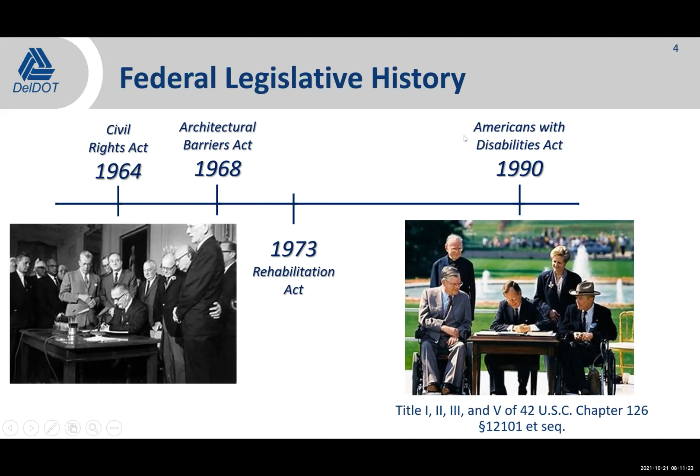So, the federal standards. We have our law, and the law required that the regulatory agencies adopt standards to enforce the law. So the 1990 Americans with Disabilities Act, out of that, the DOT and DOJ adopted standards, and the standard they adopted was the 1991 ADAAG, which stands for the ADA Accessibility Guidelines.

The original was created in 1991 and was superseded in 2004 by the 2004 ADAAG. The ADAAG was adopted in 2006 by the DOT and 2010 for the DOJ. In addition to the ADAAG, the DOJ adopted supplemental language in Title 28 of the Code of Federal Regulations, in particular 28 CFR 35.151. When these two are combined, it creates the 2010 ADA standards.

Additionally, the DOT adopted in the Code of Federal Regulations Parts 37 and 38. Something we're going to talk about quite a bit today is the PROWAG. PROWAG stands for the Proposed Guidelines for Pedestrian Facilities in Public Right-of-Way. This document is not a regulatory document. It's a guidelines document that's been created by the Access Board, but has not been adopted as a standard by the DOT or the DOJ.

Therefore, the ADAAG is the standard, and the PROWAG is a guidelines document. The FHWA has a statement to this effect in a memo they released in 2006, and that logic still stands today: until the proposed guidelines are adopted as standards, FHWA considers the proposed guidelines to represent best practices for accessibility issues in the public right-of-way not covered by DOJ's or DOT's currently adopted standards.

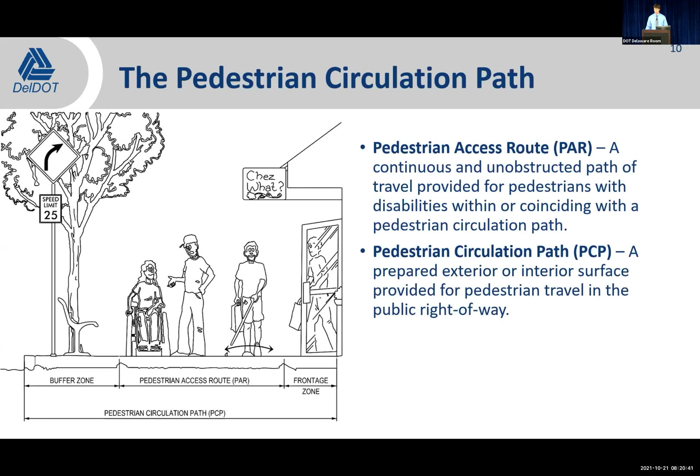2021 manual implementation: the department outlined the implementation in an October 14th memo. The memo broke down implementation into three categories: ADA inspection, request for practical exceptions, and design implementation.

ADA inspections occurring after November 1st are going to follow the requirements in the updated PASS manual. Requests for practical exceptions occurring after November 1st should also follow the 2021 manual.

The design implementation is a little bit more complicated subject, and the department has opted to use a phased implementation for this. We're going to talk about that a little more later, after we discuss why it needs to use a phased implementation.

Chapter 2 is entitled Project Type and Application of Standards. Again, a very important section. It summarizes the ADA obligations associated with the project.

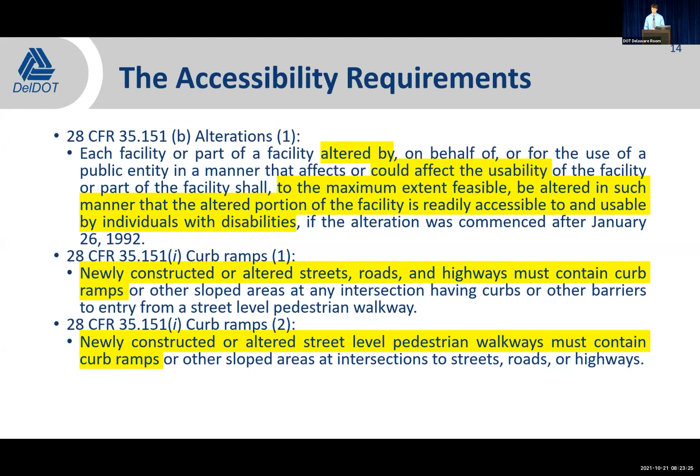So what does altered mean? Altered has been defined through the courts over the years, and the landmark case in this arena is Kinney versus Yerusalim. In this case, Kinney, the plaintiff, sued Howard Yerusalim, Secretary of PennDOT, and Alexander Hoskins, the Commissioner of the Streets Department of Philadelphia.

The suit says the city performed resurfacing but did not install curb ramps or other sloped areas on the street corners. The court determined that usability should be applied broadly, quoting, 'The ADA is a remedial statute designed to eliminate discrimination against the disabled in all facets of society. As a remedial statute, it must be broadly construed to effectuate its purposes.' Therefore, this court case ruled that resurfacing equals an alteration.

So now we've established that resurfacing is an alteration. However, there are a lot of different types of resurfacing. So questions were asked to the DOT and DOJ: what exactly is meant by a resurfacing? So much so that in July 2013, the DOT and DOJ created and released a joint technical statement establishing what is an alteration for resurfacing and what is considered a maintenance and preservation technique.

In December 2015, the DOT and DOJ also issued supplemental questions and answers, which is very informative - 15 questions and answers on the subject of maintenance versus alterations. When combined with the CFR language, you get three distinct levels of projects: new construction, alterations, and maintenance. It's important, coming from the road design background, to uncouple your preconceived notions of a 4R project or 3R project, and from an ADA perspective, just consider these three types.

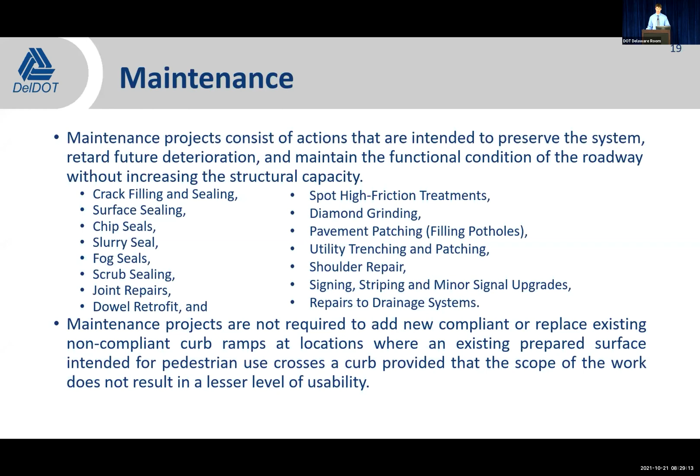One thing I want to highlight that's caused some consternation among our update team is the federal language stating that multiple maintenance activities may rise to be an alteration. That's the federal source language. When we discussed this, we decided to leave it as is - we didn't want to embellish on it, or make it too prescriptive or not prescriptive enough. The best thing to do in these instances is to contact the DelDOT Title II coordinator, and we'll talk through it. It's also important from a department standpoint to have some consistency across the state - we don't want items in the north treated completely differently than in the south.

So the last thing I want to touch on for project type and application of the standards is temporary conditions. So three documents on the federal level affect temporary conditions.

We have the MUTCD, the ADAG, and the ProWag. And of course, they all treat the issue a little bit differently.

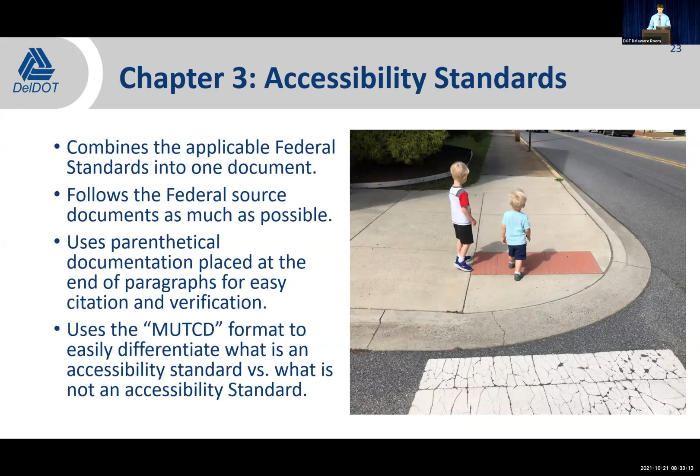So our first step as a team was to look at the difference between the two guideline documents, the ADAG and the ProWag. For example, for continuous width, the ADAG requires a 3-foot wide continuous width. The ProWag requires 4 feet. So we started with that baseline.

Here are the standards, here's the guideline, and what do we want to adopt as a department? From there, we said whether it should be a standard, what should be the standard, and additionally, if we should adopt some guidance with it. So that's the basis of the spreadsheet.

The spreadsheet was created, and then we circulated it out to the rest of the key stakeholders throughout the department to get their opinion, and had some discussions about what's in the best interest of the department.

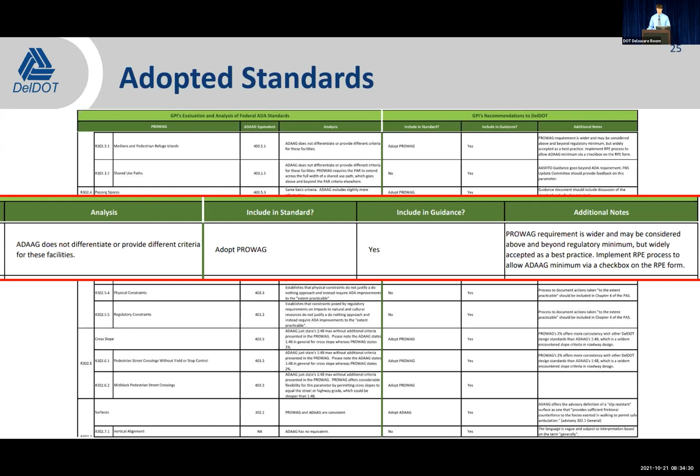Another programmatic change that we made is that we wanted to incorporate a design and layout standard versus an accessibility standard and acceptance standard. The idea behind this, what we're calling the accessibility buffer, is that if we're held to a 2% maximum from an ADA perspective, and that's the legal requirement, let's build to be below that.

So the really common example is the cross slope of the PAR. Cross slope of the PAR from an accessibility standpoint must be 2%. However, in that case, what we wanted to do was design at 1.5%, building in a buffer to account for potential irregularities or variances due to construction methods or materials.

Again, the hope is that over time this will lead to less rip-out work and just a better overall application, more user-friendly for the department.

So the standards format, mentioned before, we adopted the MUTCD format. Again, we took a couple options to the update committee, and this is what we thought would be the most clear.

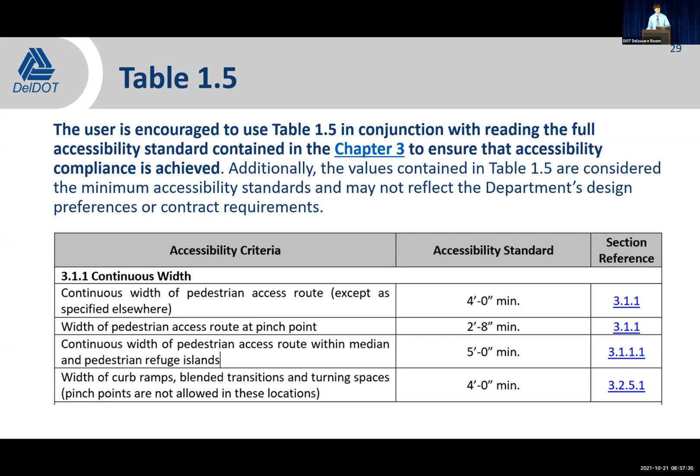One of the things we tried to do as well is add as much information from the standard as possible into that table. The standard is a standard, and if you remove or add words from that standard, you can change the meaning. So we tried to keep as much language there as possible to avoid misinterpreting what the standard is.

And again, one thing that we did was bring this up to the front of the manual. You can see it's table 1.5, so it's in the beginning of the manual, so it should be even easier to access for the user.

So chapter 4 is design considerations, and it's used to supplement chapter 3. The idea behind it is to take the legalese writing of the regulatory language and put it into layman's terms, and also apply a typical standard manual formatting to the language, put it into plain English.

It also provides guidance and best practices, which are not necessarily accessibility standards, but by putting it in the manual, our thought is that we remove some of the subjectivity behind these practices and put them in a location clearly marked as a design consideration.

Also a nice thing about chapter 4 is it divides the guidance that's in chapter 3 based on facility type. In chapter 3 we're kind of stuck in the formatting and outline structure of the federal documents, but in chapter 4 we base it on facility type. So for instance, all the information about pedestrian connections is in one place, all the information about sidewalks is in one place.

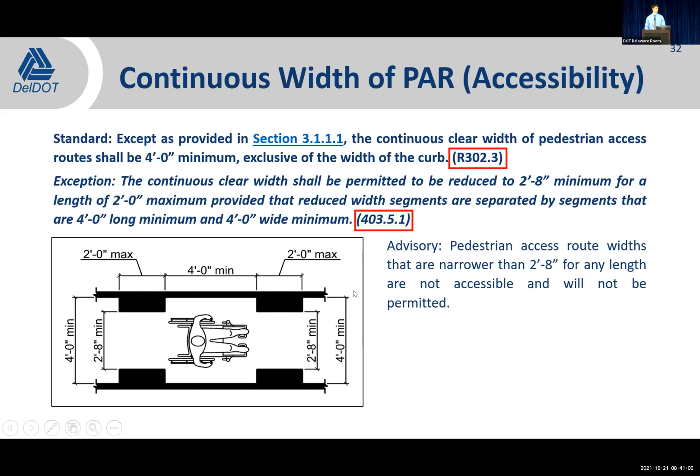And finally, we have an advisory on the slide as well. The advisory is department created. There's no parenthetical citation, and the advisory is intended to give the user additional information about the standard as well. In this case, access routes narrower than 2 foot 8 inches will not allow the mobility device user to pass, and therefore will not be allowed because it's not accessible.

A couple of examples real quick to work through how the standards are meant to be applied. First example: a sidewalk with a 3-foot continuous clear width, and a utility pole for a length along the path of 1 foot 6 inches. So it violates the standard, it's not 4 feet wide. However, it meets the requirements of the exception, which allows a minimum width of 2 foot 8 inches over a maximum distance of 2 feet. Therefore you met the exception, you did not violate the standard.

The next example is a 3-foot wide continuous clear width over a 5-foot length. In this situation we didn't meet the standard and we didn't meet the exception, therefore we violated the standard. However, the information in Chapter 4 provides information about the 2010 ADA standards, so even though we violated the department standard, we need to generate an RPE. We can justify that RPE with the federal accessibility standards because we've met the federal accessibility standards for a 3-foot wide continuous clear width.

Finally, example number 3: we have a 2-foot, 2 foot 6 inch wide access route, and that's not allowable. The mobility device user cannot pass through that distance, therefore it's not going to be allowed.

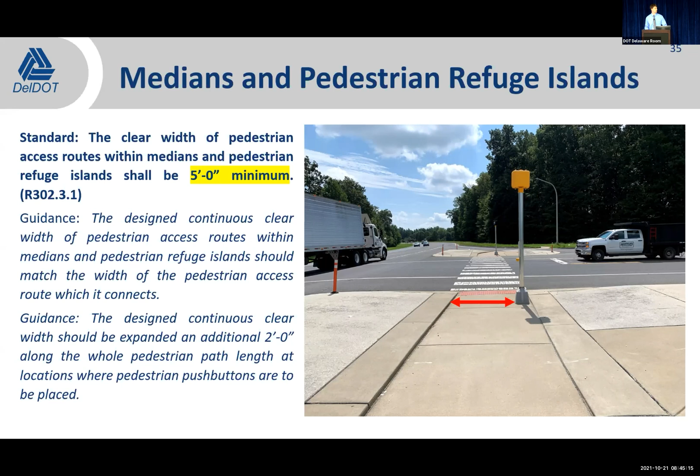Chapter 4 summarizes all this information as well. That 2 foot width, you can see the red arrow here on the slide, is the minimum width. So this is a 5-foot sidewalk, we'd add 2 feet onto that, and we'd get to our 7 foot through the median.

We accounted for this practice in our standard construction details as well. We put a note to that effect, so the standard construction details include the guidance. We want to try to meet that guidance where we can, so the standard construction details incorporate that guidance.

We mentioned we updated the width of sidewalks from 5 feet to 6 feet for some locations where there's not a buffer, and we accounted for that in the updated standard construction details. We added a note saying that if there's no buffer, please make it 6 feet wide. Again, our details are going to contain what we want to do.

Additionally, you can note that we incorporated that accessibility buffer into our details as well. We removed the 2% maximums and put in 1.5% design cross slopes and layout cross slopes, for example, to try to get what we want and give that accessibility buffer on the back end.

A couple other changes: that accessibility buffer has been distributed throughout the standard construction details. So wherever it said 2% max before, change that to 1.5%. Wherever the running grade, for example, was 5% max, we changed it to 4.5%. Again, try to create that buffer during the design phase.

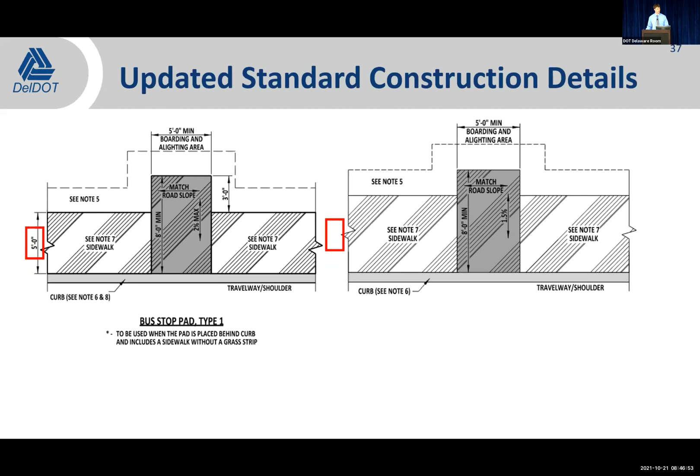Change the sidewalk width. So for example, in the bus pad details, sidewalk would defer to standard M3, which is for sidewalks, or to the plans. We removed that 5 foot dimension, so in the new details it just refers to M3. We also created that accessibility buffer by removing the 2% max, leaving it at 1.5%.

The other thing to note with the bus pad detail is that we removed the 3 foot dimension from the back of the sidewalk, and we left the 8 foot minimum dimension. The 8 foot minimum is an accessibility requirement, so we left that in there, and it also allows for variations in the sidewalk width.

A couple other standards we're going to go over: the grade of the PAR, the running slope. Departments are going to most typically perform work in the highway right-of-way, so the standard at the top is within street or highway right-of-way. That should be the department for the most part, and in those cases the running grade should meet the general grade of the adjacent highway.

Outside of the right-of-way, you're held to a 5% maximum. We also have a criteria for pedestrian street crossings: 5% maximum, and the department adopted a 4.5% design standard. So the road design folks out there are saying that my E-max the department allows is 6%, so that's a violation, we can't build up to that E-max.

So a couple of thoughts on this: one, the road design manual allows for 4% in an urban area, so the 4% would be below that 4.5%. And in addition, you shouldn't have those sharp E-max curves right at a sidewalk at an intersection usually.

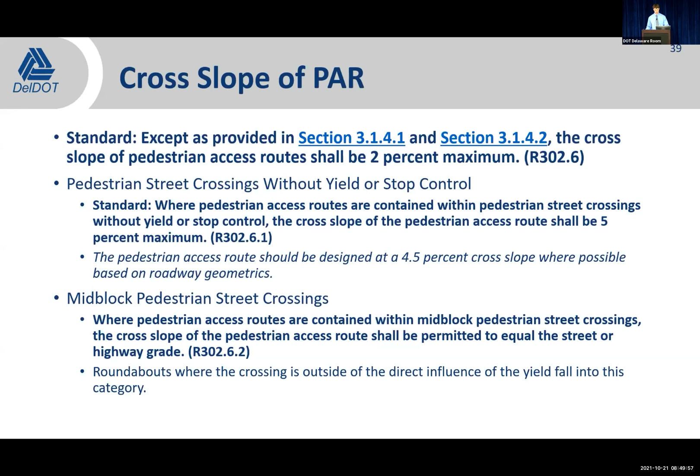One other thing to note: the cross slope requirements apply to just the PAR, not the entire pedestrian circulation path. An advisory from the ProWag states: where sidewalks are wider than 4 feet, only the portion of the sidewalk required to comply with R302.3 through R302.7 needs to meet that. So again, it's just the PAR.

You have an apron that's not depressed, it's flat instead. You have warping and a grade break inside of the path. When you go measure this, you're taking that 8-inch curb and transitioning that height difference over a 5-foot sidewalk, resulting in a slightly higher than 10% cross slope on that driveway entrance. That's not allowable under the ADA.

Our standard construction detail shows the proper treatment, and that is you have a ramp that flattens the whole sidewalk area inside of the driveway entrance.

Entrances are designed more like a pedestrian street crossing - everyone knows this location out here in Dover. This is a high volume entrance, designed with return curbs. This application should be treated more like a pedestrian street crossing. In that case, as long as there's no yield or stop control, you're allowed to have up to a 5% cross slope.

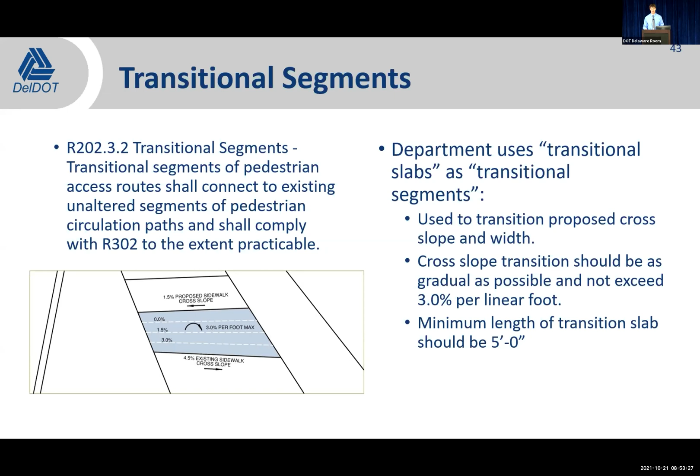This is a note we added to the standard construction details to state that practice - a 5-foot transition slab where we're meeting an existing sidewalk with our proposed sidewalk, stating we want not to exceed a 3% per linear foot transition rate.

Pedestrian street crossings: a pedestrian street crossing occurs anywhere the pedestrian leaves the approach sidewalk or shared use path and enters the street. They're typically called crosswalks, and they can be either marked or unmarked - it's not an ADA requirement whether they're marked or unmarked.

It's also important to note that R204.3 of the PROWAG specifies that a pedestrian street crossing is essentially required wherever there are departure and arrival pedestrian access routes. If there is no connection across the intersection, then you don't need to provide a compliant pedestrian street crossing because one isn't present. The crosswalks themselves create conflicting movements between pedestrians and vehicles.

So it's important that they be designed to be clear, predictable, and visible both to the driver as well as to the pedestrian.

PROWAG standards are also required, and we'll discuss that more later. Skewed crossings are included in Chapter 4 to give some guidance on preferential treatments, not an ADA standard. Skewed crossings create greater exposure time to pedestrians, reduce operational capacity, and create additional accessibility challenges. Therefore, we want to try to avoid skewed crossings where possible.

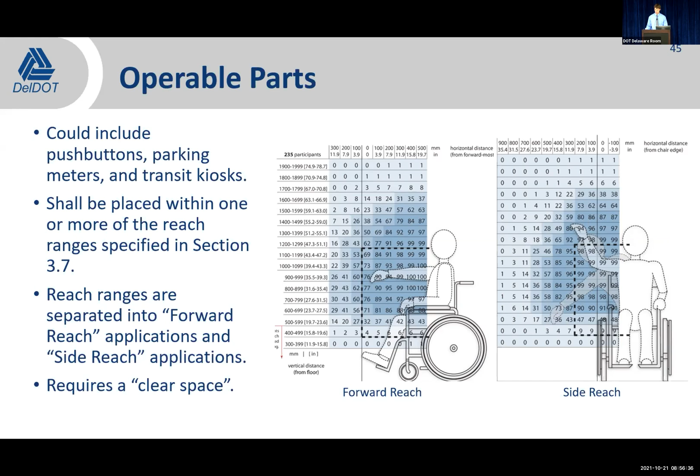Side reach unobstructed. The department's preference for all push buttons is for unobstructed side reach. Unobstructed side reach requires a maximum mounting height of 48 inches and a minimum mounting height of 15 inches. In addition, the other key requirement is the 10-inch horizontal distance between the clear space as well as the operable part.

The department's practice is that any surface that does not meet the surface requirements of section 3.1.5 - firm, stable, slip resistant - would be treated as an obstruction. In other words, between the sidewalk and the push button, you would have a 10-inch maximum for it to be considered unobstructed side reach.

In addition to unobstructed side reach, we have obstructed side reach. This should not ideally occur within the public right-of-way. However, it is an alternative and is considered accessible where it has to occur. There are two acceptable alternatives for obstructed side reach.

The one we'll use most often is alternative B in this figure. Essentially, in alternative B, the 10-inch horizontal distance gets extended to 2 feet from the clear space, provided that you meet the new height requirements of 3'10" max and 2'10" max. Again, this is not the department's preferred alternative.

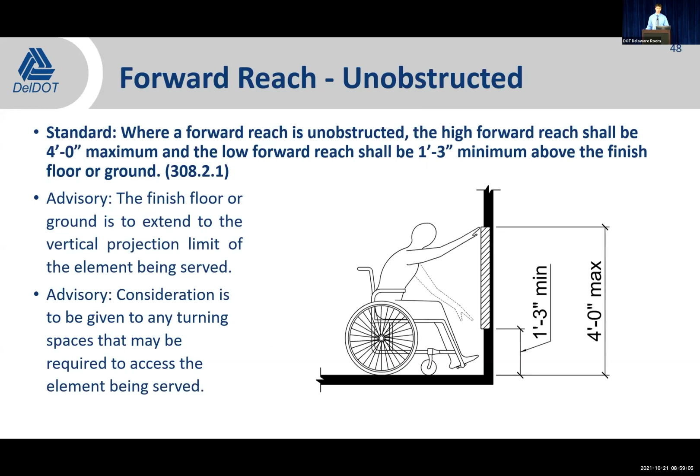The same advisories as the previous slide apply. You need to consider the vertical projection of the operable part extending all the way to the clear floor ground surface, and also consider any required turning spaces.

So, clear space. The definition of the clear space is a clear space. The Access Board does not give any more information on that. They give some technical requirements, which we'll go through right now.

The surfaces of the clear space shall comply with section 3.1.5, firm, stable, slip resistant. All surfaces of the pedestrian access route are required to comply with that section. It also requires a cross slope of 2%, which again applies to the rest of the pedestrian access route. So the takeaway is the clear space can occur anywhere on your pedestrian access route.

The size requirement is a 30-inch by 48-inch minimum. We talked about that before. The department also incorporated guidance here to try to provide accessibility for more users.

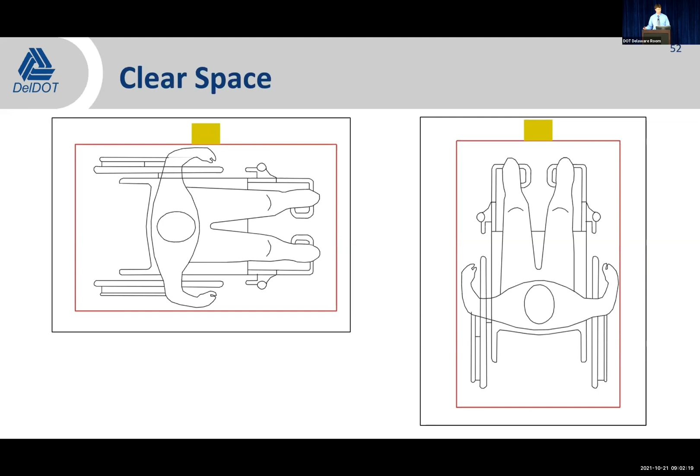What happens is that box turns into a 48 by 48 inch turning space. So again, a turning space is not required. However, you need to consider the pedestrian's movement at that operable part, because there may be a requirement to provide a turning space depending on how it's laid out.

As previously mentioned, we updated the DelDOT Standard Construction Detail T18 as part of this effort, to try to provide more flexibility to the department. Mounting heights changed—the new mounting height is now 38 inches to 46 inch max. The reason is that mounting height allows it to be considered either an unobstructed side reach or an obstructed side reach.

That said, we still want an unobstructed side reach for each pedestrian signal pole, and the details state this as well—we want this to be 10-inch maximum from the pedestrian access route. We also added a note that specifies that if it's only accessible from a forward approach, we need to extend the clear floor or ground surface all the way to the vertical projection limit of that operable part.

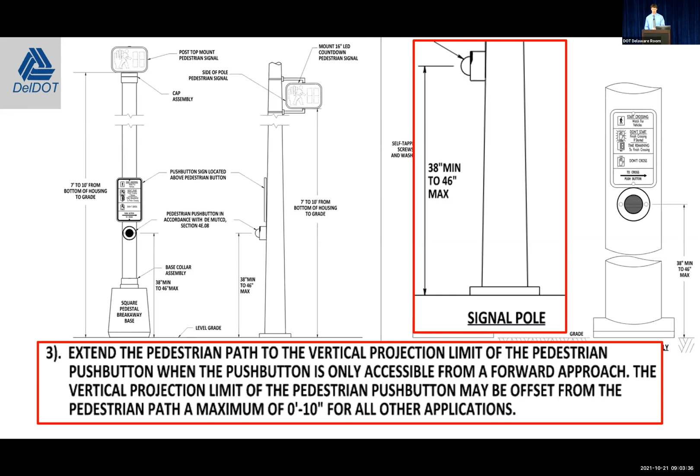So now we start to leave the accessibility standards—those are just for reach range and clear space. Now we're getting to the MUTCD. There is no mention of pedestrian signals or push buttons in the ADAAG. However, the PROWAG specifically says shall comply with MUTCD.

Once you get to the MUTCD, section 4E.08 Pedestrian Detectors has all the requirements for where the pedestrian signal should be placed, as a should condition—it's not a standard, it's a should condition. These are all the requirements on the screen, and it should meet all the following criteria, with the key word being should. Again, we've left the accessibility standards and moved into the MUTCD should conditions.

Figure 4E-3 summarizes the guidance from the previous slide and gives you recommended locations where that pedestrian signal can be placed. Again, you look at the hatching and it indicates recommended locations.

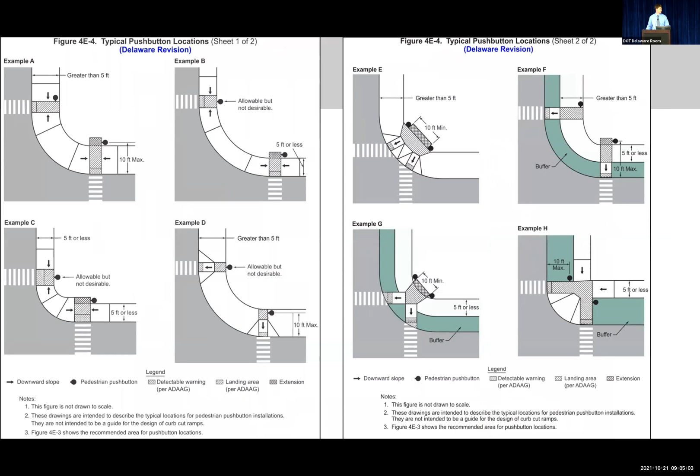Figure 4E4 of the Delaware MUTCD provides acceptable locations for mounting. Again, you need to consider how the user is going to reach for that pedestrian push button when they're approaching it, whether it's a forward reach or side reach, and how that clear space is coordinated.

The MUTCD doesn't require, but says the pedestrian push button should be placed parallel to the pedestrian street crossing. That's where we see the recommended versus not recommended arrows. The important thing is to consider how the pedestrian is reaching for that push button.

Accessible pedestrian signals are used to communicate information about the walk, don't walk signals at signalized intersections in non-visual formats. The ADAAG is silent on this practice, however the ProWAG has two sections on this, 209.1.1 and 209.2. That ProWAG guidance was not incorporated into the manual, because the department currently maintains interim guidelines for the installation of accessible pedestrian signals.

What was not incorporated was the statement that where pedestrian signals are provided at pedestrian street crossings, they shall include accessible pedestrian signals and pedestrian push buttons complying with the MUTCD. Additionally, for alterations, ProWAG stated that existing pedestrian signals shall comply with 209.1 when the signal controller and software are altered, which is different from the interim guidelines the department has. The manual essentially just kicks you over to the department's interim guidelines.

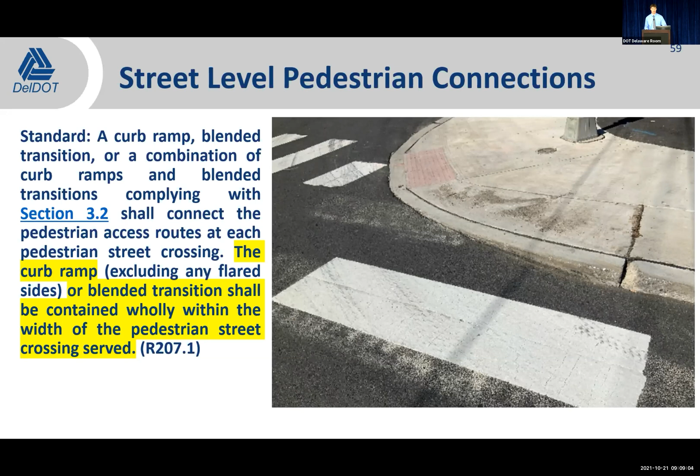Perpendicular type curb ramps. Curb ramps can be laid out in multiple orientations, which creates the name of the different types. So you have perpendicular, parallel, and diagonal.

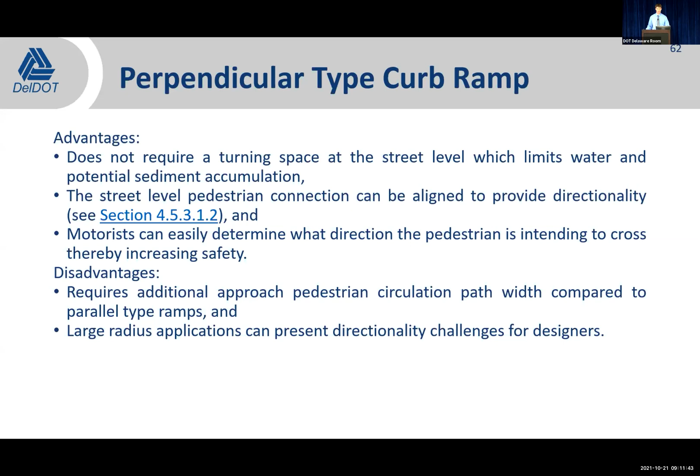Parallel type curb ramps are the next curb ramps we're going to talk about. Parallel type curb ramps have a slope segment that's in line with the pedestrian access route and brings the user down to a location where they need to turn in order to access the pedestrian street crossing.

Parallel curb ramps, again, will never have the flared side or the return curb as part of its assembly. The other key thing to think about is that the user is going to come down that ramp and then make a turn to enter the street.

Advantages of parallel type curb ramps: it requires minimum approach circulation path width, which is ideal for constrained locations. The ramps can be easily lengthened when required to chase grade. We'll talk about that a little bit more later today.

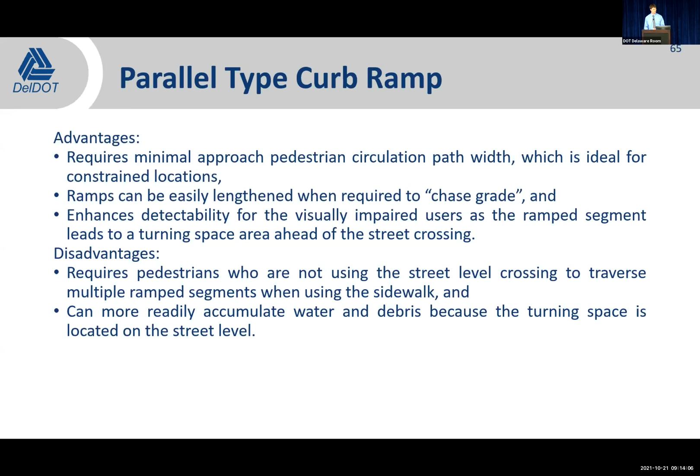Now we're going to start getting into some fun. Diagonal type curb ramps are laid out very similarly to that of a perpendicular type curb ramp. The key difference is that diagonal curb ramps serve two independent street crossings, while perpendicular curb ramps only serve one.

And why this is important is that the ADAAG, the 2010 ADA standards document, provides additional technical requirements for diagonal curb ramps. Therefore, it's important that the department creates a definition for diagonal curb ramps, so we make sure that if we install one, it meets the accessibility requirements.

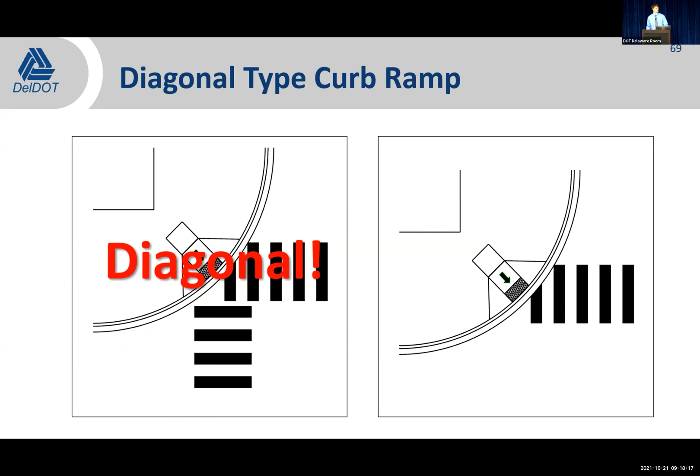And the one on the right is not preferable based on a directionality standpoint, but we'll talk about that more later today.

Last type of curb ramp, I mentioned this before, is that the three - perpendicular, parallel, and diagonal - can be combined, and the term for this is a combined curb ramp. Basically, a combined curb ramp has an inline ramp that takes the user down in elevation to a turning space, and the user can then turn in that turning space to access a perpendicular type curb ramp and go to the street level or to the street crossing.

So we've talked about the different curb ramp types. Now we're going to talk about the different blended transition types. Think about the definition I gave you before - the key criteria is that 5% slope, the running slope of the slope segment. So if you have a parallel type ramp that has a running slope of 4.5%, it's going to be considered a blended transition.

The other type of facilities you can have are depressed corners. They're self-explanatory - you depress the corner in order to have access to both pedestrian street crossings. Finally, we have a raised street crossing, which isn't very common in Delaware, but it's essentially a speed table or speed bump where the pedestrian access route is carried across the raised street crossing, acting as a traffic calming measure as well. Again, not very common in Delaware.

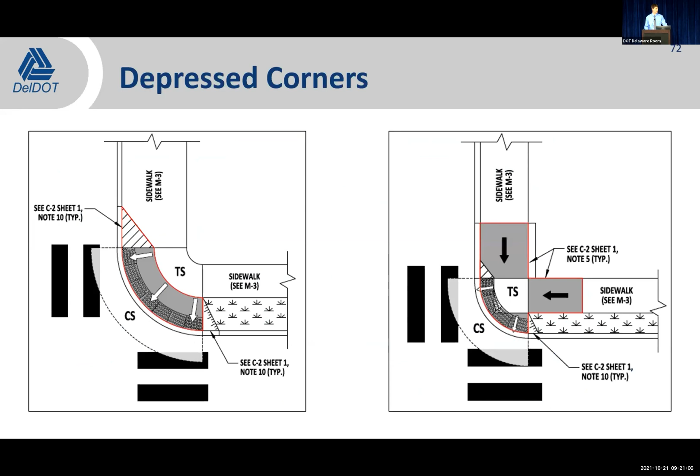Depressed corners are better than parallel curb ramps at alleviating drainage. You have a bit more flexibility on the slope - you're allowed a 5% slope where it intersects the street to try to prevent water from accumulating into the lower area. There's no turning space required, and no turning movement required.

They can be used at locations where there isn't enough space to provide separate street crossings for each curb ramp. The geometry and accessibility requirements make them ideal retrofits for diagonal curb ramps - we'll talk about that more a little later.

Disadvantages: poor directionality. There really isn't much in terms of detectable edges of the depressed corner to align the user. The boundary of the sidewalk and street is much more difficult for a person with disabilities to detect. They're also more difficult to drain than perpendicular curb ramps, which have a ramp segment that abuts the curb, making them more apt to prevent water accumulation.

Depressed corners can also encourage users to go over that corner return because they're depressed - if they want to go quickly, they can traverse that depressed corner area more easily than having a curb ramp with a curb keeping somebody out. Finally, it's difficult for motorists to determine which way the pedestrian intends to cross.

Raised street crossings - gave you the definition earlier. It's basically a speed table that's inside the pedestrian access route, allowing the pedestrian to cross the street on top of a speed bump or speed hump. There is an application in Delaware.

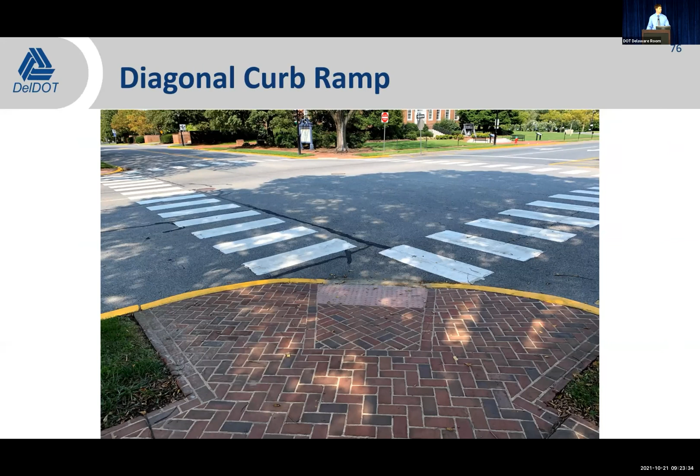You can see from this next slide why that'd be an ideal application to replace a diagonal curb ramp - basically it flattens out that whole area. Again, in this slide, two street crossings coming up to a single curb ramp - that's a diagonal curb ramp.

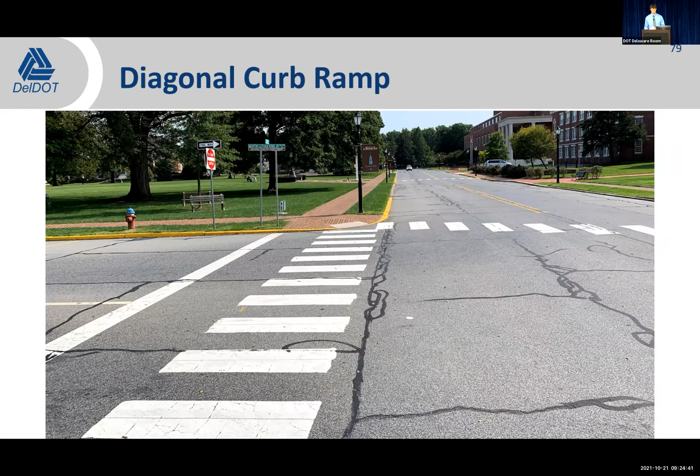So what we did as part of this update is research into what entities are calling parallel curb ramps and perpendicular curb ramps. We also reached out to the US Access Board, who wrote the standards, and got some guidance on this. The easiest thing I can summarize is: if it can have a flared side or a return curb, then it's going to be a perpendicular curb ramp. In this application, you could put a flared side on the curb ramp, or a return curb, and it would still be acceptable. With a parallel curb ramp, you could not. So for all intents and purposes, we're going to call this a perpendicular type curb ramp.

And we're also going to call this a perpendicular type curb ramp. You have another perpendicular type curb ramp here. Again, the key feature is whether you have a street crossing that's going horizontal to the screen. We definitely have one vertical, but since there's not a street crossing going across the main road here, it would be considered a perpendicular curb ramp with poor directionality.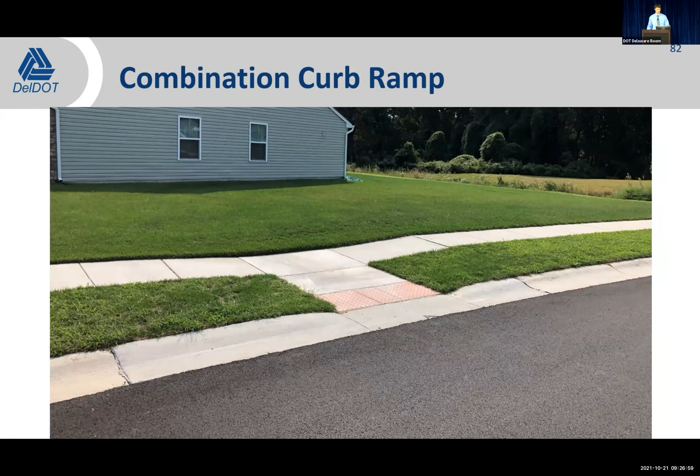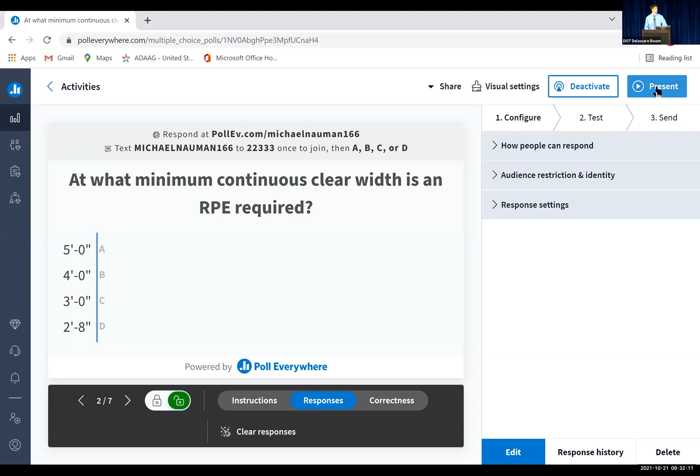So the first survey question is, at what minimum continuous clear width is an RPE required? You have the instructions at the top for how to go online and answer the question, or you can text it in.

Seeing the answers coming in, we got 2 foot 8 inches at 67%. No answers for 3 yet, that's good. 2 foot 8 inches is really starting to accumulate, awesome.

All right, so the answer to this one is kind of a twofold question. Let me wait for a second, see if responses are still coming in. Okay, I think we're starting to stabilize around the 80% mark.

So it's based on the standard as well as the exception. The department standard is the PROWAG standard, 4 foot. Then we have the exception of 2 foot 8 inches, so it depends on the maximum length of that obstruction. Going back to the examples we had before, that 1 foot 6 inch obstruction for a 2 foot 8 inch dimension is perfectly acceptable, you don't need an RPE. However, if that extends to 5 feet, like that 5-foot step, then you're going to need an RPE. Good answers, kind of a trick question off the bat.

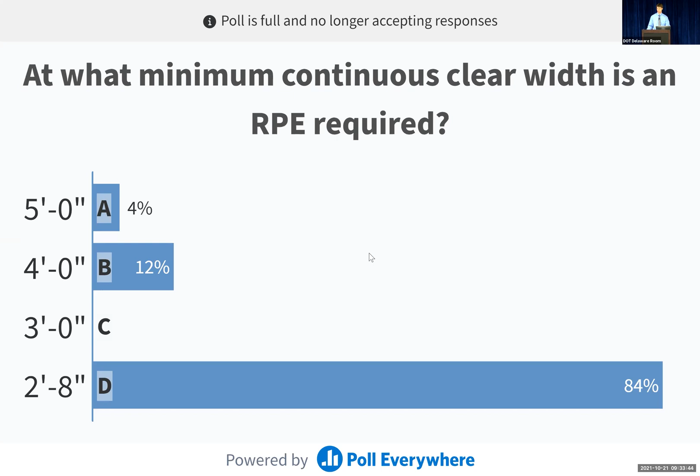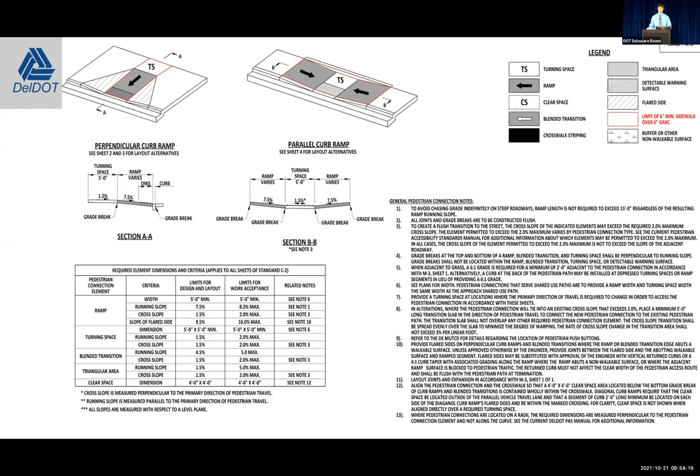So sheet 2 of the updated standard construction details - these are for type 1s, and the type 1 is defined as a perpendicular type curb ramp. We brought back the curb ramp terminology. For this application on sheet 2, it is dual approach perpendiculars - if you look at the top left, the user can access the perpendicular curb ramp from either the top of the screen or from the right. So dual approaches. The idea behind this is to give multiple layout alternatives for the designer to lay out in their plans, as well as for construction to say, this is how I need to lay out the components of the curb ramp in order to make a compliant feature.

Please note that we added a note to this detail to call out the diagonal curb ramp requirements. There are requirements specific to diagonals that aren't specific to the other types of curb ramps. The note says a single perpendicular curb ramp located on the apex of a curb return which serves two separate crosswalks is considered a diagonal curb ramp. Installation of a diagonal curb ramp requires the approval of the Department of Civil Rights Office. So again, we built the diagonal curb ramp idea into these details as well.

Sheet 3 shows more type 1s. Type 1s are all perpendicular type curb ramps, and we show how you can lay out a single approach perpendicular type curb ramp. Instead of being accessible from two directions as shown in the last sheet, these are only accessible from one direction, so a single approach perpendicular type curb ramp. We also included the note about a diagonal curb ramp - if one of these curb ramps serves two street crossings, it's considered a diagonal curb ramp and requires approval of the Office of Civil Rights.

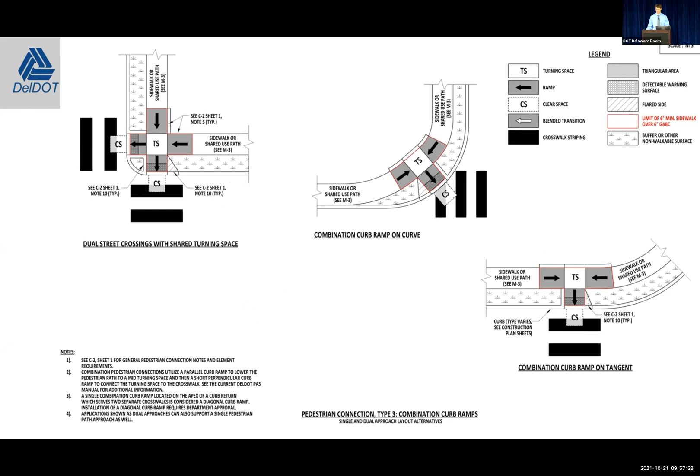Now that we've talked about the different types of pedestrian street level connections, we can start talking about the requirements. The easiest way to think about this is that the department adopted the PROWAG on these items because it offers additional flexibility not present in the ADAAG requirements. PROWAG breaks curb ramps into two sections and has an additional section for common requirements. There's also a section for blended transitions, also included by common requirements. Combining all those gives you the matrix on the slide, showing requirements for all the different types of pedestrian connections.

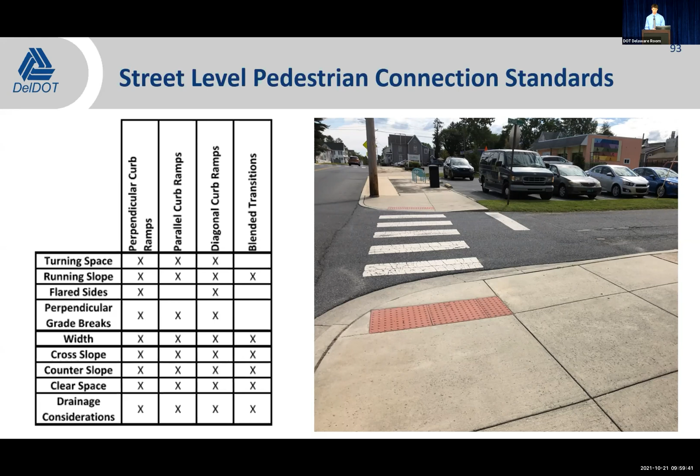First technical application we're going to talk about is turning spaces. A turning space is any location along a pedestrian access route which provides a location for a user to change their primary direction of travel. Kind of a vague definition, but that's the vagueness that's incorporated from the federal level.

They're typically located at the top of perpendicular type curb ramps. We talked about the layout of perpendicular type curb ramps before, and they're located at the bottom of the ramp for parallel type curb ramps.

The idea behind the turning space is it gives the user a location where they can orient themselves and change their direction to access either the pedestrian street crossing or to access the PAR. So because of that maneuvering that's going on there, we want to create a level area for them.

Level means a 2% running slope, 2% cross slope. We'll talk more about cross slope later, but that's generally the accessibility standard. And again, the department's adopted a 1.5% design cross slope and running slope for these applications.

Turning spaces themselves are required to be 4x4. There's additional requirements if you're in a constrained location, and typically the department's going to request that you design a turning space to be 5x5 minimum, and we have that back in our standard construction details as well.

A couple of slides to help you understand why turning space is required. Here we have red lines showing how the user can maneuver on the pedestrian access route. For instance, they can come up on one of the pedestrian street crossings, turn and go up the road or continue along the road. The user is going to need to make a turning movement at that location, depending on which direction they want to go. So perpendicular type curb ramp, turning space at the top of the curb ramp.

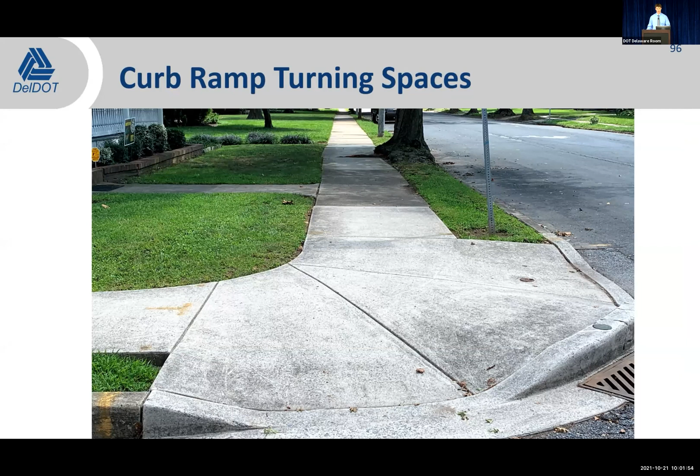The issue with this application is perpendicular curb ramps. User comes up and there's no level area or turning space at the top of the curb ramps to continue along the pedestrian access route. So that would be something that would be considered an accessibility challenge for the user, as they wouldn't have that level area to be able to turn and orient themselves on the pedestrian access route.

Parallel curb ramps. Again, same philosophy. Put down the red lines to show how the user can maneuver along that path. The red circles show you the user being able to turn to access the street or being able to turn and go up the pedestrian access route, the sidewalk. So that's why we need the level area at the bottom of the inline parallel curb ramp.

This application here, I believe it was referred to as a hot mess the other day. And the reason why is that there's no turning space at the bottom. So the user is on a curb ramp grade at 8.3%, and they're trying to maneuver themselves to get into that crossing. Very difficult maneuver for a mobility device user.

Now we come to combination type curb ramps. Again, see that middle turning space that's located between the inline parallel type curb ramp and the perpendicular type curb ramp that takes you out to the pedestrian street crossing, sorry.

So a question that I will ask you, and I want you to think about for a second, is a single approach perpendicular type curb ramp, where is the turning space? The answer is there is none. The user comes down and they access the curb ramp, they don't need to turn, and then they can access the pedestrian street crossing.

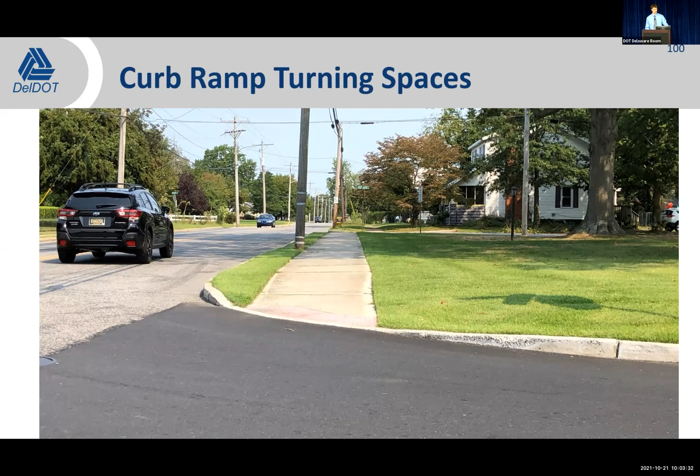The U.S. Access Board has guidance on this as well, and this is for the ADAG, but it also applies to the PROWAG as well. The image on this slide is from the Access Board, and their quote is, if the only connecting accessible route runs parallel to the ramp run, the top landing can be a slope of 1 to 20 max. That 1 to 20 max is 5%, which in the ADAG is the running grade that's allowable for a pedestrian access route. In our environment, from a public right-of-way standpoint, our running grade is permitted to be equal to that of the general grade of the roadway. So it can be 5% or it can exceed it if it's in line with the roadway.

So this is kind of the Access Board statement that we don't need a turning space where there's no turning maneuver. And the turning maneuver would be a change in the user's primary direction.

This practice is accounted for in the manual, especially in Chapter 4, and it's also accounted for in the details. The detail on the left covers perpendicular type curb ramps with dual approaches, where you'll have that turning maneuver at the top of the ramp. However, on the right side of the screen, we have a single approach perpendicular curb ramp with a see Note 5, which states you don't need a turning space since there's no turning movement required. This should only happen on single approach perpendicular type curb ramps.

Curb ramp turning spaces: we adopted the PROWAG for most of the pedestrian connection elements for our standard. The PROWAG requires a 4x4 foot area be provided for a turning space. However, the PROWAG also includes requirements that the turning space be elongated in the direction of the pedestrian street crossing in applications where the turning space is constrained. Constrained is not defined by the PROWAG in that application, so the department had to create their own definition of a constrained area.

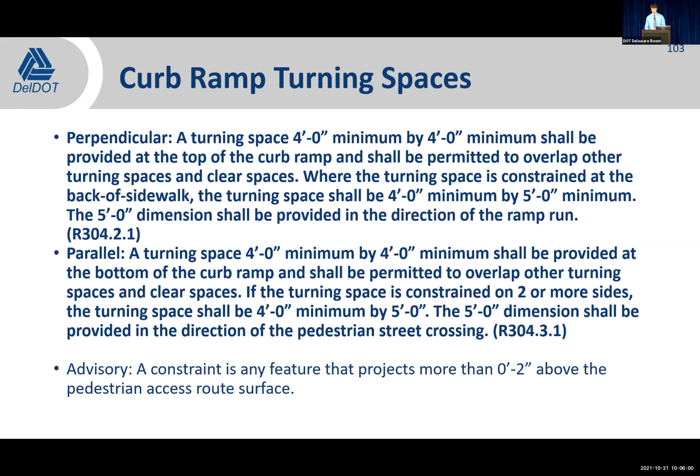Curb ramp running slope: a lot of us are familiar with the 7.5 or 8.3% running slope criteria for a curb ramp. However, there's a provision in the PROWAG, which we adopted and the department has used for some time, that the length of the curb ramp can be held to a 15-foot maximum, and the grade on that curb ramp can exceed 8.3% in grade chasing scenarios.

So our guidance is to lay them out at 7.5% up to 15 feet. If you need to exceed 15 feet to stay at 8.3%, just leave it at 15 feet and let the grade exceed that 8.3% maximum. We adopted a note for the details to this effect: to avoid chasing grade indefinitely on steep roadways, ramp length is not required to exceed 15 feet regardless of the resulting ramp running slope. This is why, in a grade chasing scenario, we don't want a perpendicular type curb ramp with a steep running slope throwing someone into traffic.

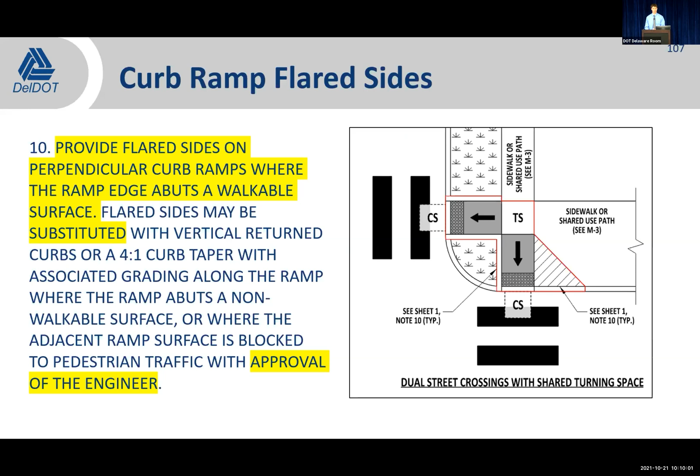Curb ramp grade breaks. A grade break is defined as where two locations that have separate slopes come together, i.e. a grade break. They need to be parallel or perpendicular to the path of travel on a ramp, because it makes for easier maneuverability onto and off of that ramp. If it's skewed, it can create some challenges for the mobility device user. So for ramps it's a requirement, and on blended transitions it's not required, but it's still a best practice to have the grade breaks be perpendicular.

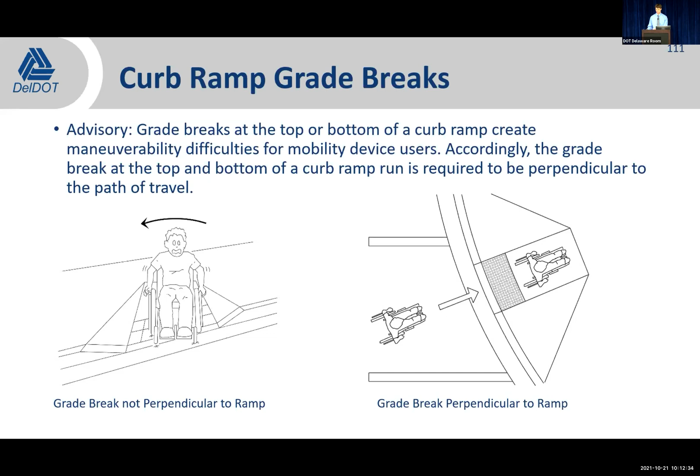So let's not do that. Again, here's an image that shows why this would be a challenge—the person would have to either swing wide to take that grade break perpendicular, or create some instability as they're trying to maneuver that.

Pedestrian connection width—this is another fun topic. For the ProWag, we adopted portions of it for this, specifically that all curb ramps, blended transitions, and turning spaces shall be 4 foot wide minimum. However, we also adopted a portion of the ProWag primarily related to shared use paths as guidance: that the turning space, blended transition, or curb ramp is to be the same width as the approach pedestrian access route.

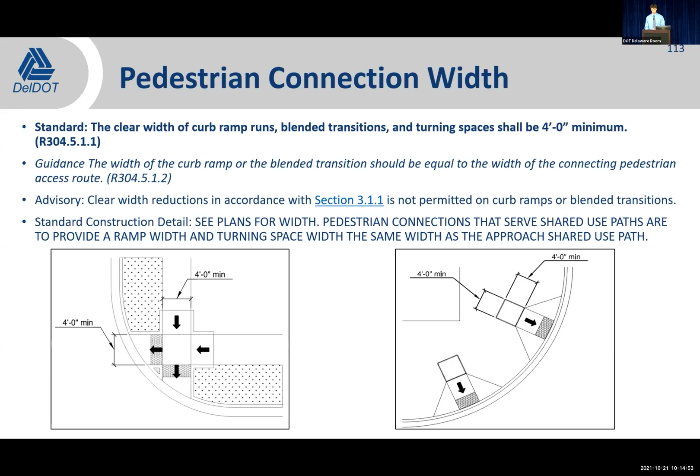The example I'm going to give here kind of shows why the department went the route it did: a 10-foot wide shared use path coming down to a pedestrian street crossing, with sidewalk on the far side and the near side as well. So the question is, is that curb ramp a violation of the ADA and the spirit of the ADA? Remember, the spirit of the ADA is to remove access barriers. If I ask the group right now whether there's an access barrier here, I'd probably get some mixed responses.

The current PROWAG would say this is an accessibility barrier, whereas the ADAG would say this is not an accessibility barrier. So to try to create some flexibility for the department and leave room for engineering judgment, we said at minimum we want a 4-foot wide curb ramp and a 4-foot wide turning space. However, please provide a path that's the same width as the approach shared use path - trying to get the best of both worlds here.

Pedestrian connection cross slope - this is going to be another fun topic. We talked before about section 3.1.4 of the cross slope requirements for the pedestrian street crossing, and the guidance here for curb ramps is very similar. Essentially we want a 2% max.

We want to lay it out to 1.5%. However, depending on the traffic control at the intersection, we're allowed to go up to 5% or to match that of the roadway. So if it's not stop controlled, without yield or stop control, we're allowed to go up from section 3.1.4 up to a 5% maximum. At a mid-block crossing, we're permitted to meet the general grade of the highway.

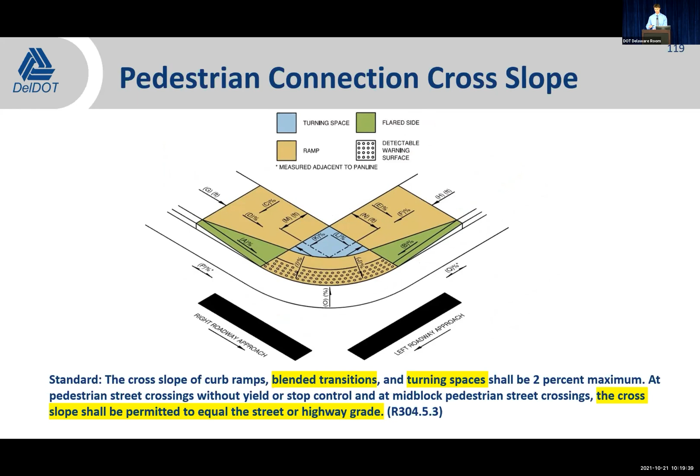I mentioned before that the parallel curb ramps are not going to have this issue of the transition because it's all contained to that turning space. However, perpendicular curb ramps, to meet the maximum extent feasible language of the CFR, are going to be required to provide a turning space or a connecting pedestrian access route that is compliant to the maximum extent feasible.

So what that means on this top image, if we have a paired perpendicular ramp, that turning space at the top of the ramp segment needs to be built to the ADA standard, which is 2% maximum cross slope, running slope 1.5% is what we want for design. So if the bottom of that ramp is held to the street crossing cross slope, that means that all the transition is going to need to occur inside of that ramp segment.

So the department adopted some guidance on this, and please note, this is not an ADA requirement. If you look through our standards, there's no requirement for how you transition that cross slope and the rate you transition that cross slope. However, we wanted to remove some subjectivity from this, and we wanted to give a criteria. So the criteria we adopted was a 3% cross slope transition rate over a per foot basis. So again, have a 5 foot ramp, multiply that by 3%, you get 15%, you can transition that cross slope.

Is that a best practice? No, we ideally want that to be flatter, but we really shouldn't have that occur very often in Delaware. And the 3% was a value that we evaluated from other states, what other DOTs are doing, and 3% is pretty common. Again, we don't want to hit that, but others are doing it, so that's what we kind of decided to follow. Try to remove some subjectivity from the practice.

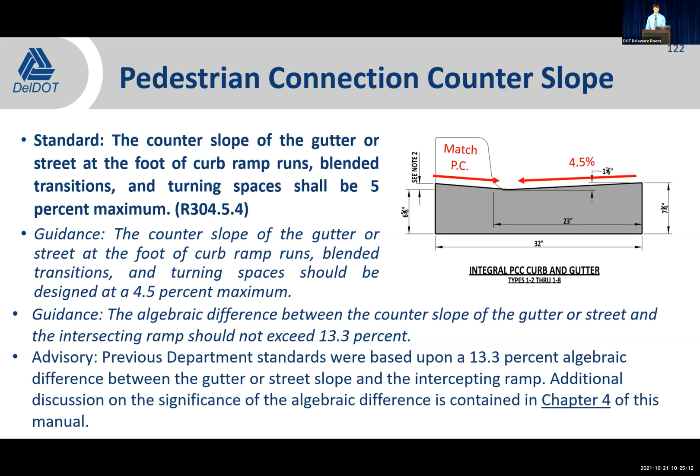One of the things the PROWAG also recommended was if you violate that counterslope criteria of what they suggested was 11%, was to add in a level strip, a 2-foot level strip between the two different slopes. So we have the slope of the ramp, and we have the roadway slope or the gutter pan slope, and they took a 2-foot area and put it between the two. The idea behind that is to not create that snagging point. In the top image, you see the wheelchair user coming down, footrest gets caught, and this becomes an accessibility challenge. Whereas in the bottom, you add that 2-foot level strip, and wheelchair users can more easily traverse that location. This is a mitigating technique that can be used where you're not able to meet that 5%, or you have other features there violating the actual accessibility principle behind the counterslope criteria of the maximum algebraic difference.

Now we get into pedestrian connection clear space. So clear space is in both the PROWAG and the ADAG, and it's kind of a difficult concept. So we're going to back all the way up to where the clear space originally came from.

Clear space originally comes from the ADAG, and for the ADAG, it came out of 406.6, which is just for diagonal curb ramps. The ADAG states that for diagonal curb ramps, the bottom of diagonal curb ramps shall have a clear space, 48 inches minimum, outside active traffic lanes for the roadway. All that's given from the standard standpoint is clear space. There's no technical requirements on the grade or the cross slope of that clear space. You can see on the image where that clear space aligns. You have that 4-foot area that needs to be outside the active travel lanes. Again, just a clear space, no technical requirements.

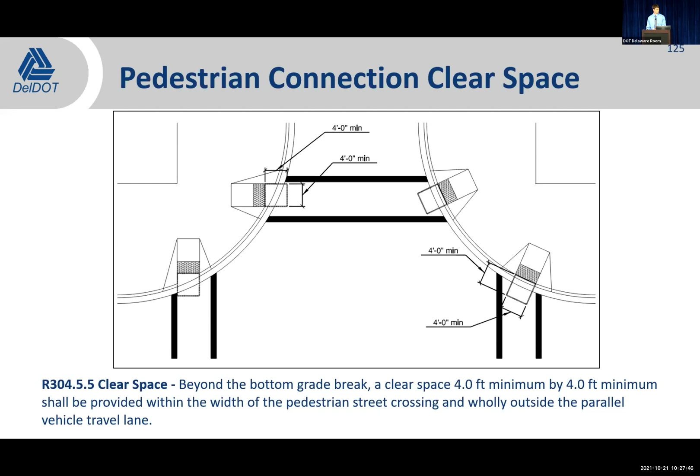So if you're like me and you hear parallel vehicle travel lane, you ask yourself, what does that mean? So we asked for clarification on what a parallel vehicle travel lane means. We got that clarification, and if the lane is marked, the travel lane would be measured from the outside of the striping. If the lane is not marked, it's to be measured from the tangent to the face of the curb prior to the radius. If there is a turn lane or auxiliary lane, it would be considered a travel lane.

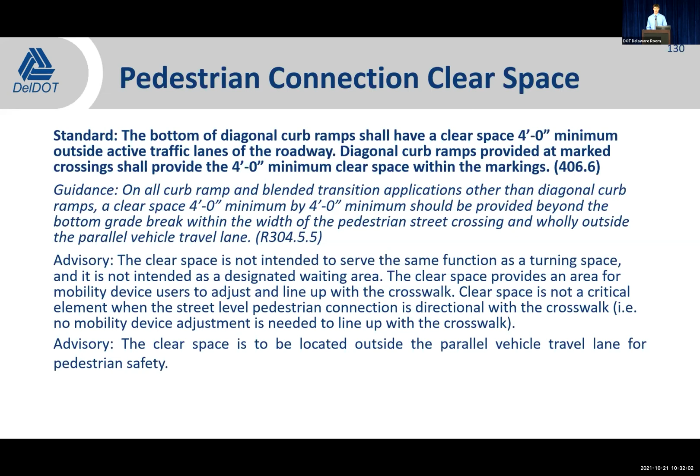Another topic we've talked about a lot as a department is our requirements for pedestrian connection drainage. The way pedestrian connections are laid out creates the potential for water accumulation—you're taking an elevated access route and lowering it to the street connection, while also channelizing water typically at the curb line. In addition, we're flattening the gutter pan slope based on our accessibility requirement for the counter slope. All those criteria create the potential to pond water right at the bottom of the ramp, and ponding water hinders operations both during and immediately after a storm event.

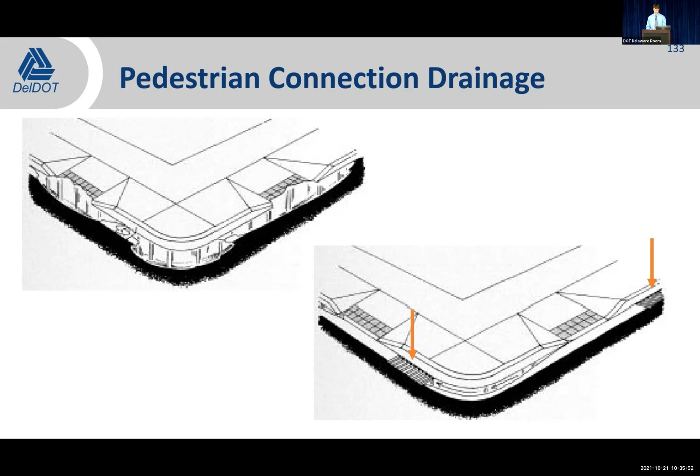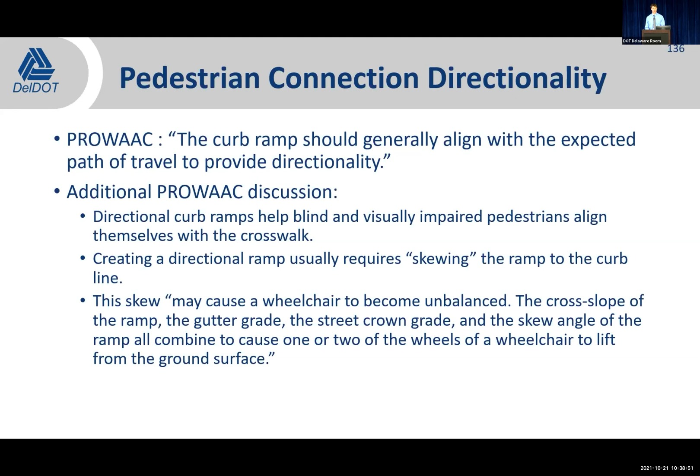They also recognize the challenges that creating this directional curb ramp can create. The PROWAAC contains the quote: 'The skew may cause a wheelchair to become unbalanced. The cross slope of the ramp, the gutter grade, the street crown grade, and the skew angle of the ramp all combine to cause one or two of the wheels of a wheelchair to lift from the ground surface.' So they're recognizing both the advantages and disadvantages. There's good and bad with this, and it's really related to the user.

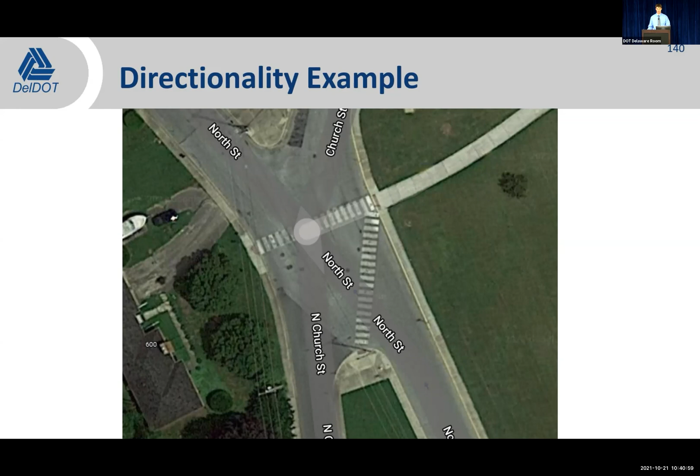Here's an example of two pedestrian connections and how they're coordinated with the marking. This is not good from a directionality standpoint, and it's also a violation of the ADA. The reason why is that the pedestrian connection is not wholly within the pedestrian street crossing.

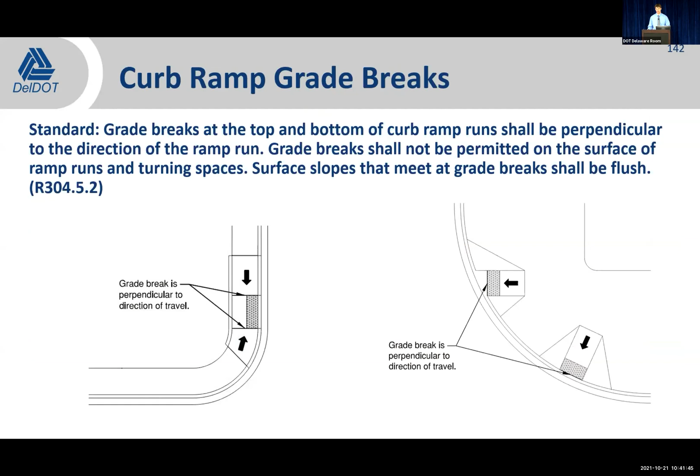The other thing to consider with this is the curb ramp grade breaks and how to consider that in connection with the directionality of the curb ramp. As we said before, on curb ramps where the ramp segment exists, we want the grade break to be perpendicular to the user's travel, and the reason why is to create stability for the user.

When you combine the principles of directionality with grade breaks, you arrive at two options. Option one is to place the grade break at the bottom of the curb ramp at a 90-degree angle to the curb. This is good from a drainage standpoint—you have the 8.3% sloped ramp segment at the bottom, which reduces the skew that can cause challenges for the mobility device user. But from an alignment standpoint, it's not in line with the pedestrian street crossing. Option number two is to create that funky triangle. The grade break is still kept perpendicular to the curb ramp, however you're creating that skew, which may cause issues for the mobility device user, and because you have that flat area at the bottom, you might have a location that can accumulate water.

If we do install that funky triangle, the accessibility standard for that is 5%. We would treat it as a blended transition, or we would treat it as part of the grade requirements for the pedestrian access route. But ideally we want to leave that at 2%.

So again, going back to what's in the manual about directionality: please note how the grade breaks are aligned with the pedestrian connection and the ramp, so that you create stability for the user and also create directional alignment. Again, this is contained in Chapter 4—these are design considerations we give you. It's not an accessibility requirement; it's for the engineer or the person laying it out to make these decisions on a case-by-case basis.

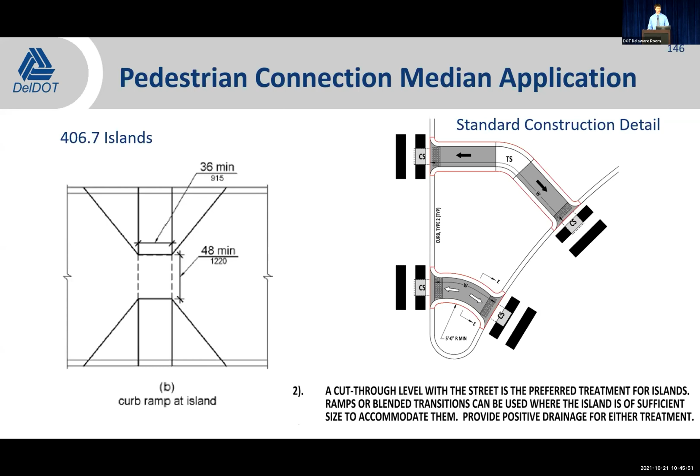This is the note we added to the standard construction details that makes the requirement clear: that 4-foot area at the top of ramped applications is required to have a turning space in those locations.

So, detectable warnings—truncated domes. It's important in this conversation that we focus specifically on truncated domes. There are other types of detectable warning surfaces out there, but this conversation is specifically about truncated domes, which have a specific meaning in the public right-of-way.

They're meant to indicate the boundary between pedestrian and vehicular routes where there's a flush connection rather than a curb. We all recognize that if there was a curb at the bottom of the pedestrian street crossing, a mobility device user couldn't go over it—so it's a barrier. However, that curb was a useful detectability cue for the visually impaired. So when we remove the curb, we have to put something back as a cue to alert the visually impaired to that street crossing. The truncated dome detectable warnings are kind of an accessibility compromise between those two user groups.

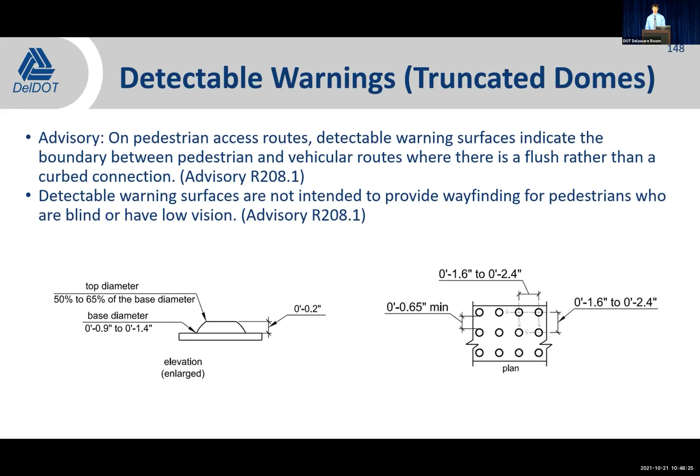So we adopted the ProWag language for locations to apply truncated domes. The nice thing about ProWag is that they included all the language about DWS requirements into one section, so it's very transparent and easy to find. The ADAAG essentially had the same requirements, but they're spread out in multiple locations, and they're essentially equivalent.

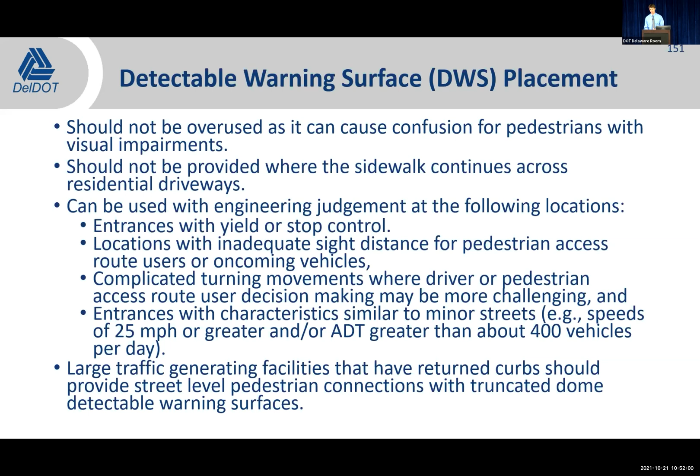One thing I hit on before for the treatment of pedestrian street crossings and cross slopes is large traffic generating facilities that are going to be designed as a pedestrian street crossing. So those areas, the large traffic generating areas that have return curbs, please add the detectable warning surfaces there, since that's going to act as a pedestrian street crossing.

So pedestrian connection DWS placement - the ProWag is very explicit in where they say to place DWS, and the reason they're explicit is those locations have been selected to present a clear message to the user.

For example, if we have a perpendicular street crossing and the DWS are placed too far off of that crossing, the user gets to that DWS, feels it, and doesn't feel any change in the surface after that, and it dilutes the message and confuses the user. Therefore, it's important to put the DWS in the location that makes sense for the user and gives them the most information they can.

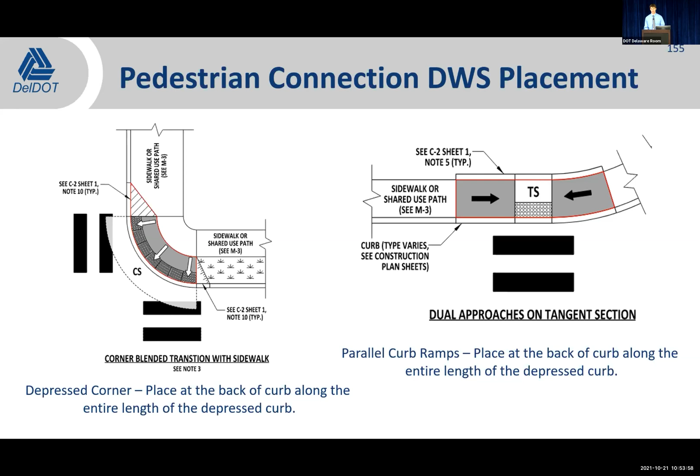And that's what's shown in this detail on the slide, and also shown on sheet 7 of the details as well. Parallel curb ramps, again, placed along the back of the curb along the entire depressed area. Pretty straightforward for both those applications.

Pedestrian refuge islands and median applications also require DWS. Again, the user is about to cross into the street, so we need to alert them to crossing into the street. The PROWAG contains language that if the pedestrian's travel path is 6 feet or less, or if the separation between the DWS is less than 2 feet, we shouldn't provide DWS at that location.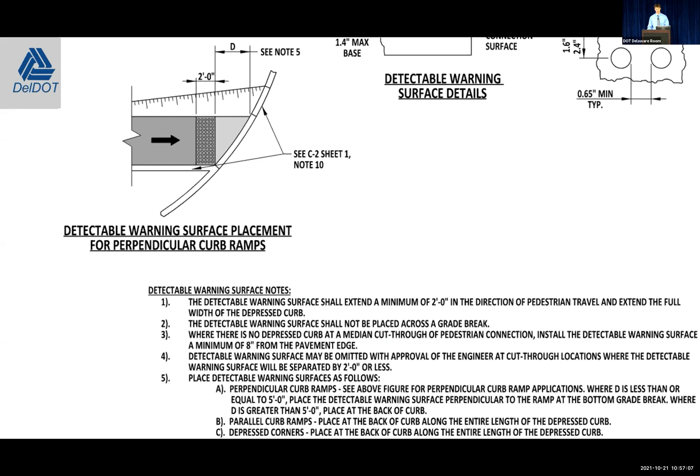We try to make the details as user-friendly as possible. We put all the information about DWS, truncated domes, in one location, on sheet 7. It essentially states everything I just talked about and where the DWS should be coordinated with the different pedestrian connection types. It should be very clear for the designer laying it out, as well as for the field staff constructing it, where the DWS should be placed.

One thing that's a little bit different, a change of practice for the department, is that DWS are permitted to be on the curb ramp run. Currently, we've kind of been avoiding putting them on the ramp run, but they are permitted to be on the ramp run.

So we're also going to talk about temporary access routes during the construction phase. Again, as mentioned before, these have the same requirements - there's a requirement under the ADA to provide access routes during construction as well. There are really 3 objectives during temporary conditions: you want to separate pedestrians from conflicts with worksite vehicles, equipment, and operations; separate pedestrians from conflicts with mainline traffic moving through or around the worksite; provide pedestrians with a safe, accessible, and convenient travel path; and duplicate the existing route as much as possible.

So here's an order of preference, from least intrusive to most intrusive. Our first priority should be to utilize existing facilities as much as possible - that's the easiest thing to do, and you can use pedestrian flaggers for this as well. The next priority should be to maintain a portion of the existing site on the same side of travel as the area being worked on, because you can provide same-side access to the land uses that people are trying to get to.

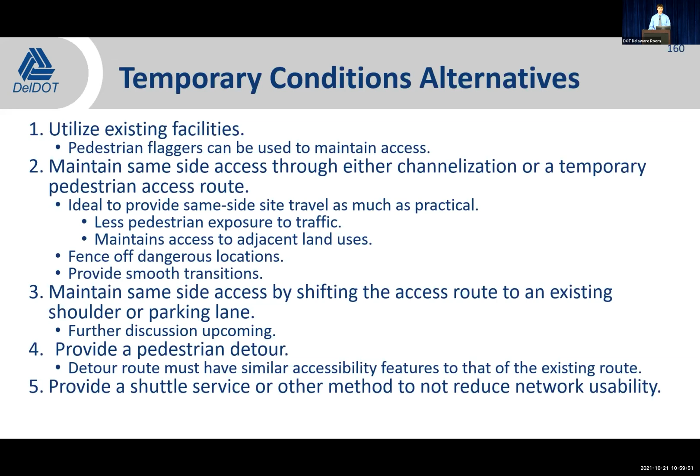If that's not available, what we can also do is provide a pedestrian detour. This is not as preferable as the other options. The pedestrian detour is going to require additional street crossings, which creates exposure for the pedestrian. And also, you might not be able to provide access to the same sites that you would if you maintained same side access. And finally, if none of those alternatives are available, you can provide a temporary shuttle service or other method to maintain usability.

This slide shows typical application 28 from the Delaware MUTCD. This is the alternative where you're taking, in this case, a parking lane and providing it for the pedestrian to access, provide same side access to the land uses. Again, can be considered on multi-lane streets as well, but you need to give consideration to the type of traffic that's there, as well as positive protection for the pedestrian.

Another alternative, this is TA29, provided pedestrian detour route, in the Delaware MUTCD. We provide a pedestrian detour route. It needs to be approved by traffic safety. In all cases, according to the MUTCD, the temporary route needs to provide similar accessibility and detectability features as that of the original route, and that's an MUTCD requirement. We want to adequately sign these locations so that the user is alerted to how to maneuver around these. We don't want them to go all the way to the work and then have to backtrack that same distance. So try to provide the signs in a logical manner, and again, use the MUTCD as a reference for this.

We want to create a compliant ADA work zone, and that sometimes just means thinking about some items during the design phase as well as the construction phase and how it affects the access route. In this case, we have a VMS board placed in the pedestrian access route, alerting the user to upcoming construction about 10 days out. The design group could have thought about where there's not going to be a building so they could place this VMS board and it'll still convey the message needed. And from a construction standpoint, they could have looked for another area, or rotated the trailer and sign so that it still provides the information needed, but is outside of the pedestrian access route.

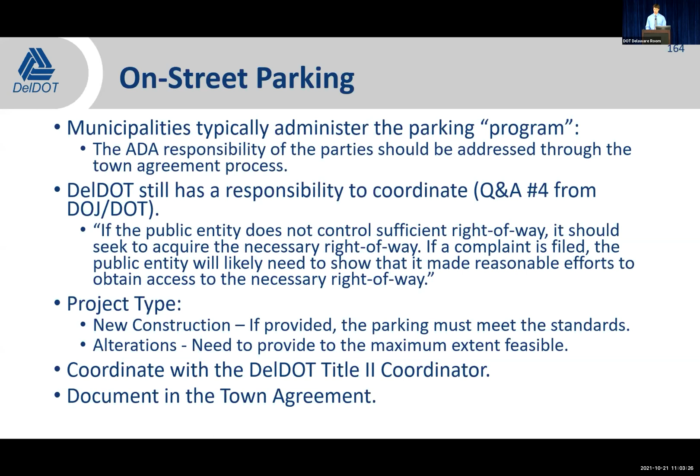The thing to consider with this too is it goes back to project scope. So new construction, you need to meet the requirements for on-street parking. Alterations, meet it to the maximum extent feasible. And maintenance, you don't need to consider the on-street parking requirements. Again, something to think about during the design phase early. Talk about it with the Title II coordinator, coordinate with them early, and try to get all of the information documented about obligations and agreements for the on-street parking into the town agreement. Again, the parking is the municipality's program, but we're affecting it, so it creates that multiple layers of authority and creates challenges for the department.

Moving out of the standards now. Real quick, I didn't think these items required too much discussion today, but I did want to alert everyone to some changes from the previous manual to the current one. Surface requirements, section 3.1.5 of the new manual—these are the firm, stable, slip resistance requirements that we're all familiar with. One thing we did in the updated manual is provide some additional clarification from the department standpoint on sedimentation and its requirements.

So we used the CFR language to provide a greater perspective of what sedimentation entails and requires. And we also added some more information for the user to consider.

The department had previously adopted the PROWAG language for vertical alignment, which was generally planar and generally smooth. That's now been adopted as guidance, since we thought it was really hard and subjective criteria to enforce. Instead we adopted something quantifiable, provided by the FHWA in their best practices manual from a long time ago: 11%. So if you have an algebraic difference in the pedestrian access route of 11%, please avoid that. Again, adopted as guidance, not a standard, but something we want to avoid. The good thing is it's quantifiable, so we can talk about numbers rather than generally planar and smooth.

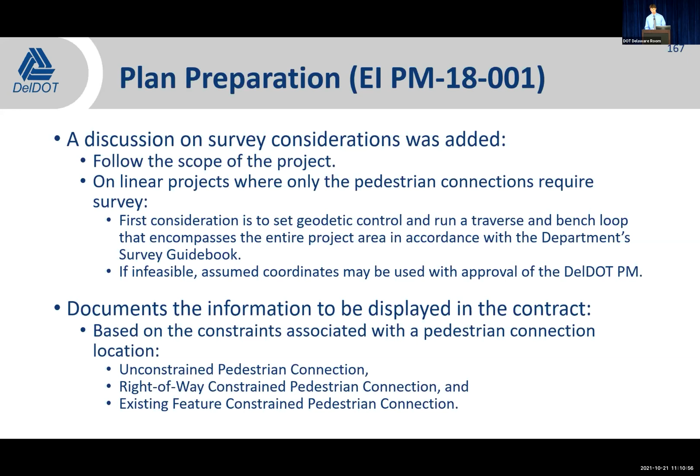The information required to be displayed in the contract documents is directly tied to how constrained the environment is. The more constraints, the more information needed, both for the designer to look at and to provide to the contractor so they have enough information to create the design as intended by the engineer. Because of that logic, we created three classifications, which are also in the existing EI: unconstrained pedestrian connections, right-of-way constrained pedestrian connections, and existing feature constrained pedestrian connections.

This shows you on the DRC how to find this engineering instruction, which has been updated at this time.

Unconstrained pedestrian connections occur where the existing environment can be readily altered, so a standard construction detail can work pretty easily. What's required in this location, from a pedestrian connection standpoint, is to specify the appropriate standard construction detail, provide geometric points at the limits of the depressed curb at the interface of the pavement and the curb and gutter or curb, and shade the region of the template to provide information to the contractor. Again, the engineer of record needs to verify that a standard construction detail will work in these locations. If they get out into the field and it doesn't work, you're going to have issues, so try to verify that during design.

One thing to note, based on the program developing these plans, is that these can either be contained in one sheet or across multiple sheets throughout the plan set.

Next, we come to right-of-way constrained pedestrian connections. These are pedestrian connections where the limiting factor is either the existing or proposed right-of-way, and it's going to be constrained accordingly. The first priority should be to use a standard construction detail as the simplest option. If using a standard construction detail, we want to create a detail that shows all the elements laid out, proves it essentially fits inside the public right-of-way footprint, and provides the same information as the unconstrained pedestrian connection detail—geometric points, depressed curb, shaded limits—along with the construction detail showing the pedestrian connection fitting inside the right-of-way.

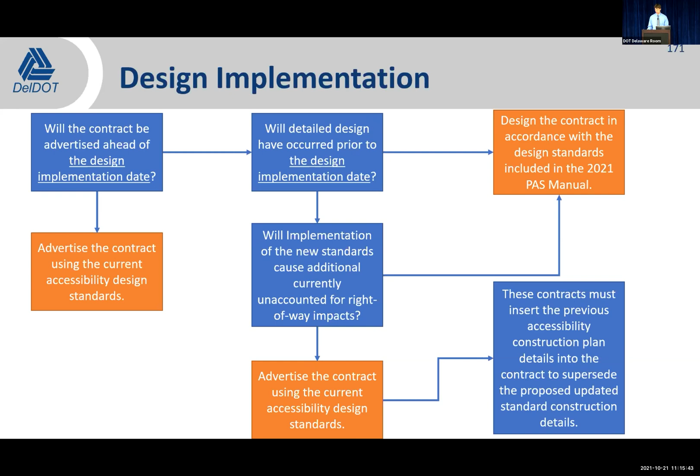Basically, if you can incorporate the new standards, please do. We discussed them, we think they're good practices to follow, and it's going to lead to fewer issues in the field. However, if there are project constraints local to your project that won't allow that, we understand. The way you can move around that, even after that implementation date, is you can add on a case-by-case basis the current details.

Which is the big thing from a contract document standpoint, back into your plans. The way you can do that is you can grab it from the Design Resource Center publications page by clicking the MicroStation icon and downloading the MicroStation file. According to the contract hierarchy, the construction details override the standard construction details, and you're good to go.

Chapter 5. So Chapter 5 is a new chapter, as we mentioned before, and the idea is to provide additional transparency to the inspection acceptance process. This is something that was highlighted during the development process that we wanted to make more transparent to the staff.

Inspection acceptance process, it overall follows the path you probably think of: build the features, inspect the features, and accept the features. And that's what this flow chart lays out.

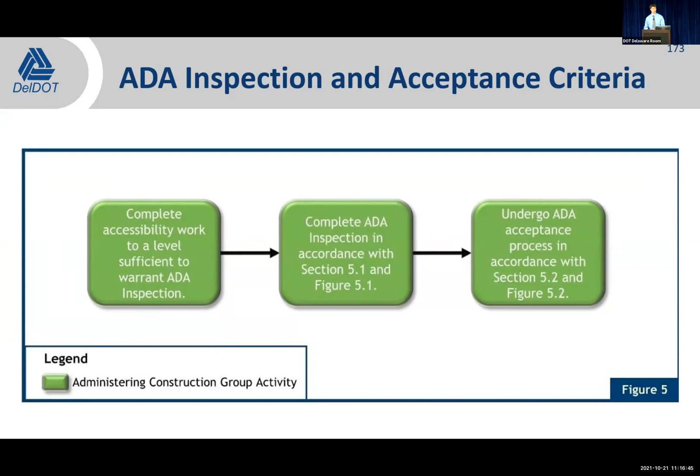All ADA inspections must be performed prior to the final inspection. The group administering the construction is tasked with requesting those inspections. On larger construction projects and open-ended contracts, the construction group should give consideration to requesting inspections as geographic locations of work are completed or as phases are completed, just to make it easier chunks to break off. The engineering support section will perform the ADA inspections, document the deficiencies, and alert the administering construction group once all the information has been added to the ACIA application and deficiencies are highlighted.

The administering construction group can respond to each deficiency highlighted either with a picture or a statement if they disagree. Once they're done responding, they'll submit that to the DelDOT Title II coordinator. The DelDOT Title II coordinator then steps in as part of the acceptance process and will review that inspection report. If the Title II coordinator says the construction did everything needed and we have an accessible network, they will issue a letter recommending acceptance into the maintenance inventory to the construction group, and the construction group will turn that over to the maintenance group at time of acceptance.

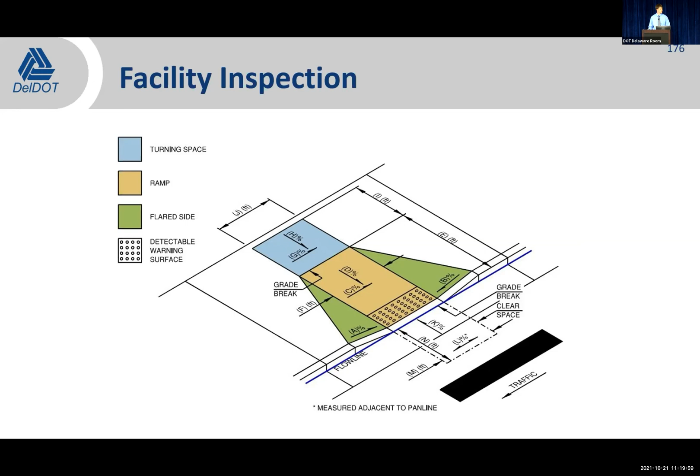In addition to that figure, we have a table. The table says exactly how we're measuring that criteria. So G and H, I gave you before, it's a percentage and it's a slope. It's a slope of the turning space cross slope, and it's the running slope of the turning space. We also say where we're going to measure it. We're going to measure it in the middle of that turning space.

And we also say what's required from an accessibility standpoint. We're not saying what's required from the contract requirements. So for example, we said we want to do 1.5% as our layout, but we're required to do 2%. That 2% is what's on that chart. If you meet those 2%, you're good from an ADA standpoint.

Again, the goal is to try to create transparency through the process for all the users involved.

So now we come to Chapter 6, request for practical exceptions. Requests for practical exceptions are required where we're not able to meet the standards in Chapter 3 and where you have to meet the standards according to Chapter 2 of the manual. So requests for practical exceptions can occur for physical constraints encountered, or for public safety considerations or operational issues.

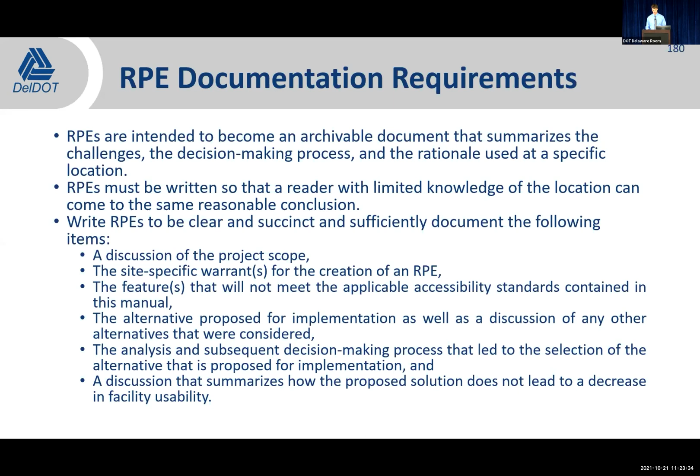So the warrants for the RPE. Both the ADAAG and PROWAG contain some locations that consider where an RPE may be applicable. We took the requirements in the ADAAG and PROWAG language, and also investigated what other state agencies are using as their warrants. We did this to offer better guidance to staff and to better categorize the RP information and when you're allowed to get an RPE and when you're not. The result of that is the warrants on the screen.

Tying this back to the scope, highlight the right-of-way availability. The wording we use, which is commensurate with multiple other state agencies, is that the warrant applies at a location where adopting the minimum standard in this manual will require purchasing additional right-of-way, and the project scope would not otherwise require the purchase of additional right-of-way. Again, it's based on the scope of the project.

Some more RPE warrants. The one thing I'll call your attention to is that on these warrants, based on DOJ and DOT guidance, cost cannot be a reason for the entity not to perform the work. The limiting factor is the scope, so keep that in mind as you're generating these RPEs.

We wanted to provide more explicit and direct content to the staff generating these RPs. We broke up the RPEs based on the project development phase in which they're occurring. Accordingly, we have design phase RPEs, construction phase RPEs, and administrative RPEs.

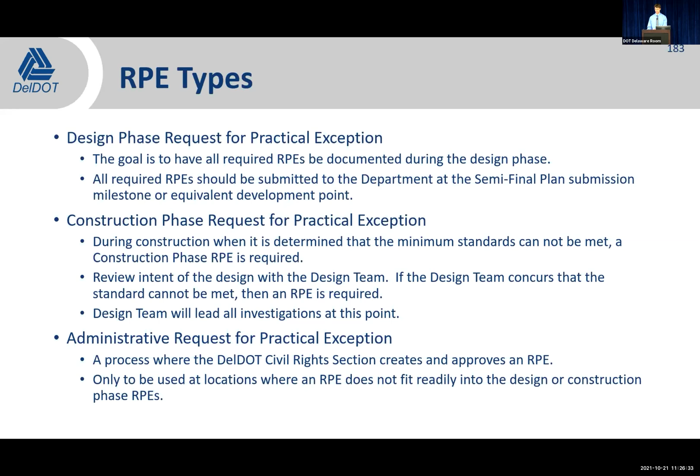So the RPE form—let's quickly walk through what's included. In the first section, general information about the project: contract name, contract number, the project purpose, which is where we get into the scope. You need to clearly state the scope of the project so we're not chasing items outside of the scope, and so it's clear documentation for the user who picks up after us.

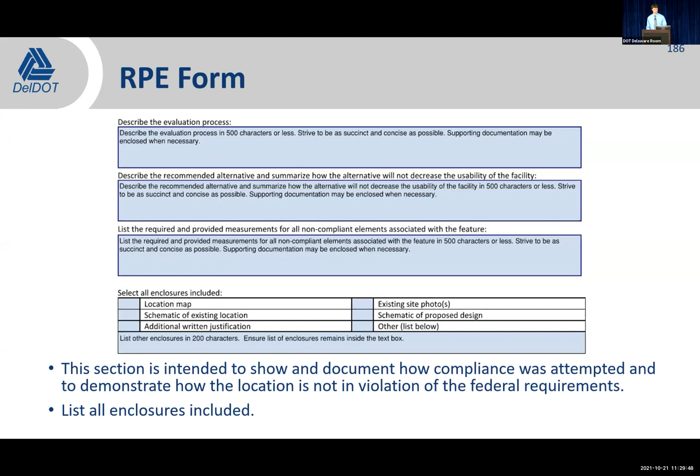At the bottom here, we encourage the user to provide certain items with the RPE. Again, it needs to be easy for someone to pick up 20 years from now. So we're requesting a location map, a schematic of the existing location, so you can easily follow the logic. Check off those items as you have them, and anything else they want to provide, they're welcome to list in the enclosures box at the bottom.

So finally, the RPE is good to sign. For the signature process, please follow PM 18002 or PM 19001, which tells you how to sign the form. The prepared-by location should either be signed by the engineer of record, or by someone under the supervision of the engineer of record.

The reviewed-by should be someone competent in the field of accessibility, ideally someone in the department or section generating the RPE — not a consultant, but DelDOT. This is a DelDOT review before it goes to the Title II coordinator. The approved-by line will always be the DelDOT Title II coordinator, who is listed at the bottom and will approve the RPE.

So again, we looked at the plan, or different processes around the department, and asked where we could make improvements. One thing we identified was creating a plan review process that specifically looks for disability or accessibility issues during the design phase, to catch these before they get into inspection and construction, rather than having issues with the contractor on site. So the goal is to catch these early in the project development process.

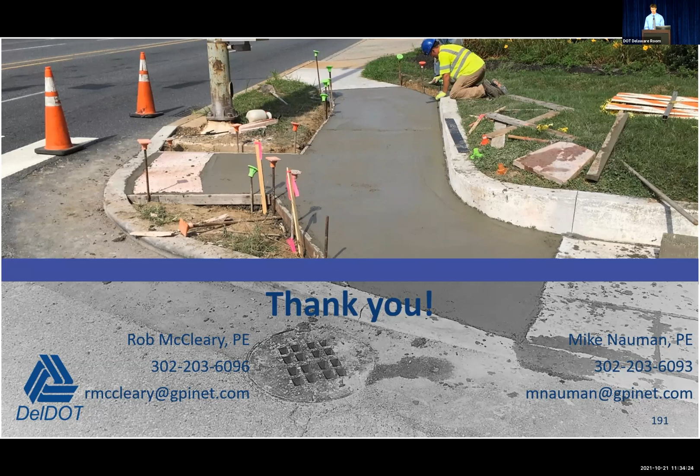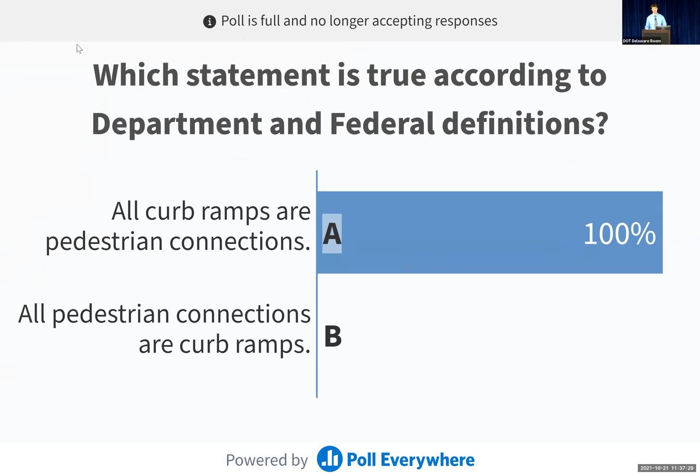So which statement is true according to the Department and federal definitions? This is a square and rectangle question. I'm very pleased so far. Very nice, 100% - I think that's close enough or good enough. Yes, all curb ramps are pedestrian connections, but not all pedestrian connections are curb ramps, and I think we tried to make that abundantly clear in the updated manual.